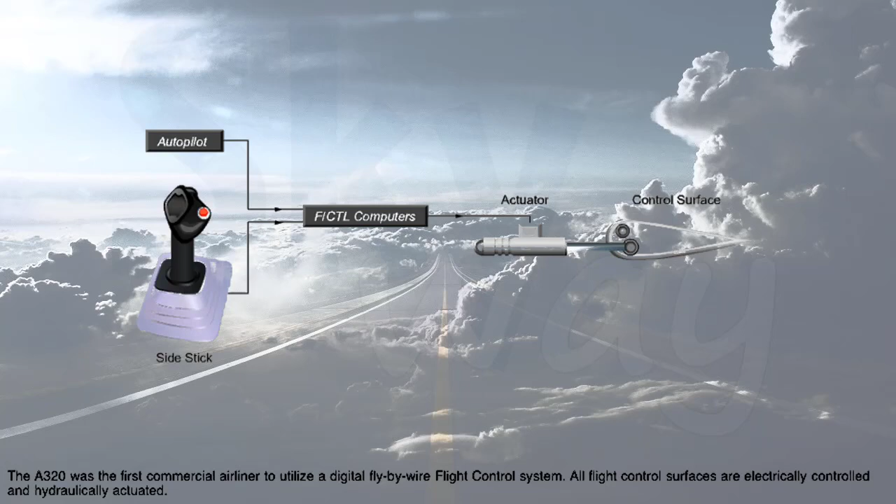The A320 was the first commercial airliner to utilize a digital fly-by-wire flight control system. All flight control surfaces are electrically controlled and hydraulically actuated. This eliminates most of the traditional mechanical complexity and results in reduced weight, reduced maintenance costs, and increased reliability. It also provides optimum aircraft performance and improved fuel efficiency.

Control surfaces on the A320 are conventional. Pitch control is achieved by two elevators mounted on a trimmable horizontal stabilizer. There are 5 spoiler panels and 1 aileron on each wing. Roll control is achieved by the ailerons and spoilers 2, 3, 4, and 5.

In-flight speed brakes are provided by spoilers 2, 3, and 4, and ground spoilers are provided by all 5 spoiler panels on each wing. Yaw control is achieved by a one-piece rudder mounted on the vertical stabilizer. The trimmable horizontal stabilizer, or THS, and the rudder, in addition to electrical control, are mechanically linked to cockpit controls to provide a means of controlling the aircraft should a temporary, complete loss of electrical power occur.

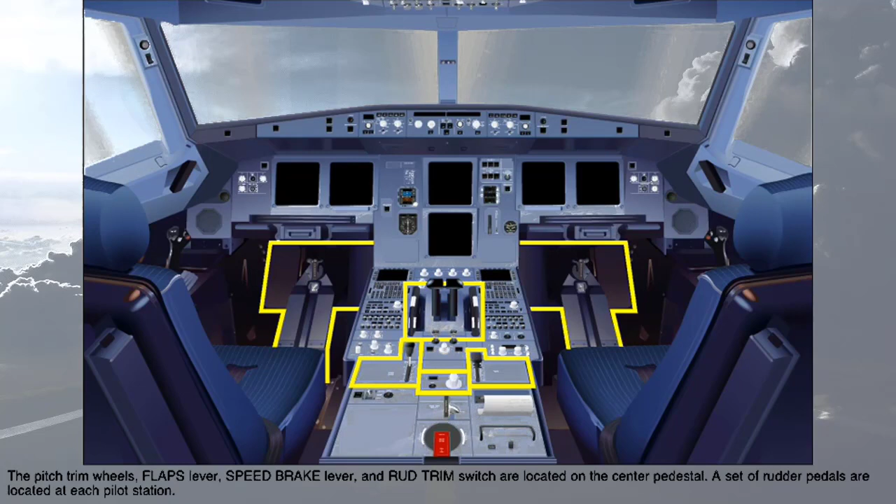Each wing has 2 trailing edge flap surfaces and 5 leading edge slat surfaces that act as lift augmentation devices for takeoff and landing. The pitch trim wheels, flaps lever, speed brake lever, and rudder trim switch are located on the center pedestal. A set of rudder pedals are located at each pilot station. Note there is no aileron trim. Touch a control location to see an enlargement or the right arrow to continue.

The flaps and slats position indicator is found on the upper ECAM display unit. Additional flight control information is found in the memo section. The traditional control column has been replaced by a sidestick controller. The sidestick, along with an auto-trim system, enables the pilot to fly the aircraft more smoothly, with more precision and less effort, and provides a more comfortable ride for the passengers.

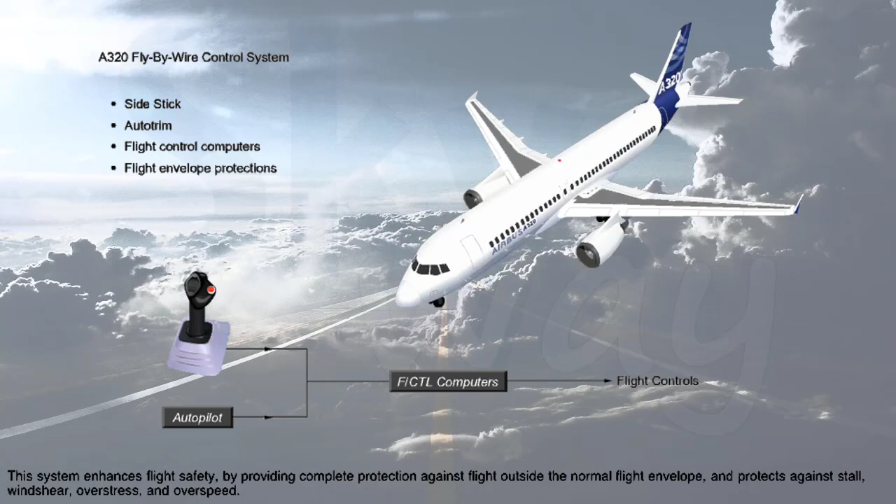Inputs from the sidestick or from the autopilot are processed by the flight control computers, which command the control surface actuators to move as necessary. This system enhances flight safety by providing complete protection against flight outside the normal flight envelope and protects against stall, wind shear, overstress, and overspeed. The sidestick controllers are located on the side consoles.

Flight control is achieved by 3 types of computers, arranged to provide redundancy and failure protection. Different manufacturers, different hardware, and different software have been used to eliminate the potential for common errors. Electrical power sources are also from different electrical buses.

There are 2 elevator aileron computers, or ELACs, for elevator, stabilizer and aileron control, 3 spoiler elevator computers, or SECs, for normal spoilers control and standby elevator and stabilizer control, and 2 flight augmentation computers, or FACs, for electrical rudder control. 1 SEC or 1 ELAC is capable of controlling the aircraft in both the roll and pitch axis. The electronic flight control switches are located on the left and right sides of the overhead panel.

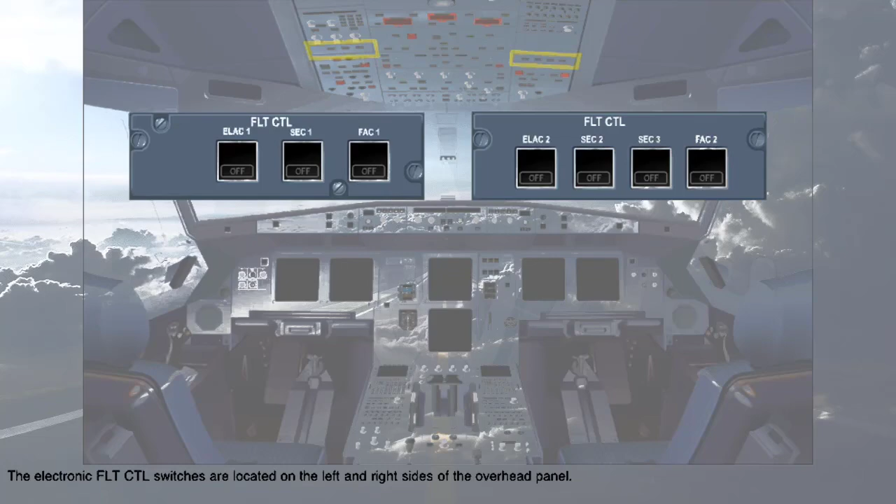The ECAM flight control page is displayed automatically with certain flight control faults and can be selected at any time with the flight control push-button switch on the ECAM control panel. The ECAM wheel page also duplicates the ground spoiler status.

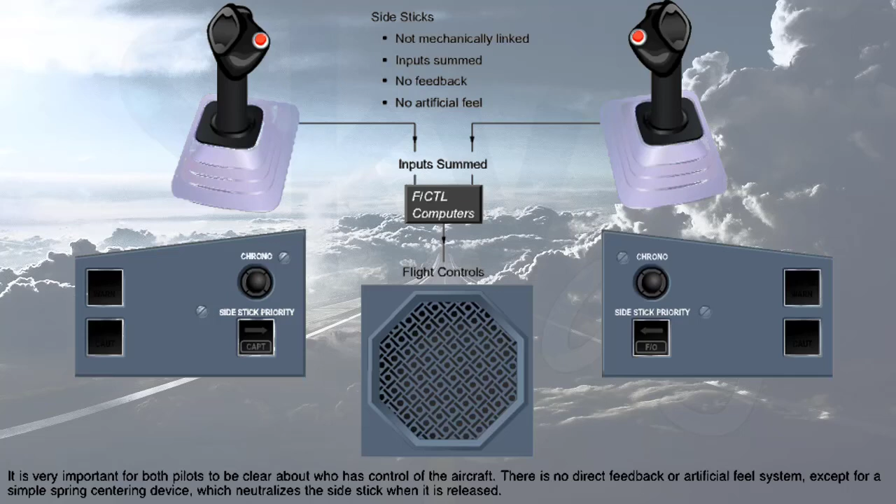The 2 sidesticks allow the pilots to control the aircraft manually in both pitch and roll. They are not linked mechanically, but simultaneous inputs by the captain and first officer are summed. The sum is limited to the maximum deflection by a single sidestick. Dual inputs will cause both green sidestick priority lights to flash and a continuous aural warning, "dual input," will sound. It is very important for both pilots to be clear about who has control of the aircraft. There is no direct feedback or artificial feel system, except for a simple spring centering device which neutralizes the sidestick when it is released.

On the ground, after the first engine is running, the sidestick position indicators come into view on the PFD. They disappear when the aircraft is airborne. The white corner indices indicate the limit of sidestick travel, while the white cross indicates the actual sidestick order from both sidesticks. This is useful for checking full sidestick movement before takeoff, but does not indicate actual control surface position. For control checks, use the surface position indicators on the ECAM flight control page.

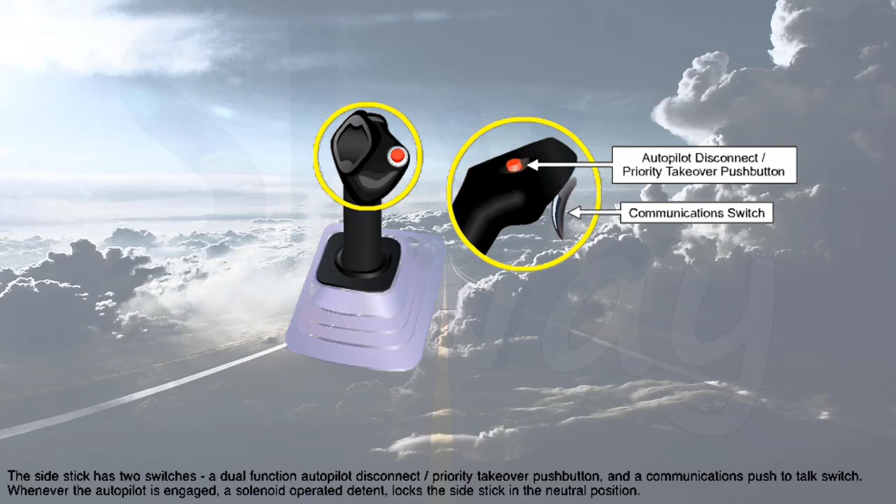The sidestick has two switches, a dual-function autopilot disconnect priority takeover push button and a communications push-to-talk switch. Whenever the autopilot is engaged, a solenoid-operated detent locks the sidestick in the neutral position. If necessary, the detent can be overridden with sufficient pressure to unlock the sidestick, which will also disconnect the autopilot. The normal method to disconnect the autopilot, however, is to press the autopilot disconnect push button on the sidestick.

A pilot can take full control and deactivate the other sidestick by pressing and holding his priority takeover push button. If held for at least 40 seconds, the other sidestick is latched out, and the priority takeover push button can be released without losing priority. Each time a sidestick priority is taken, an audio message, priority left or priority right, is heard. Touch a priority takeover push button.

In addition, the sidestick priority lights on the glare shield indicate which pilot has control. A red arrow in front of a pilot indicates his sidestick has been deactivated and the other pilot has control. To reactivate a sidestick, momentarily press its priority takeover push button. The last pilot to press and hold the priority takeover push button gets control.

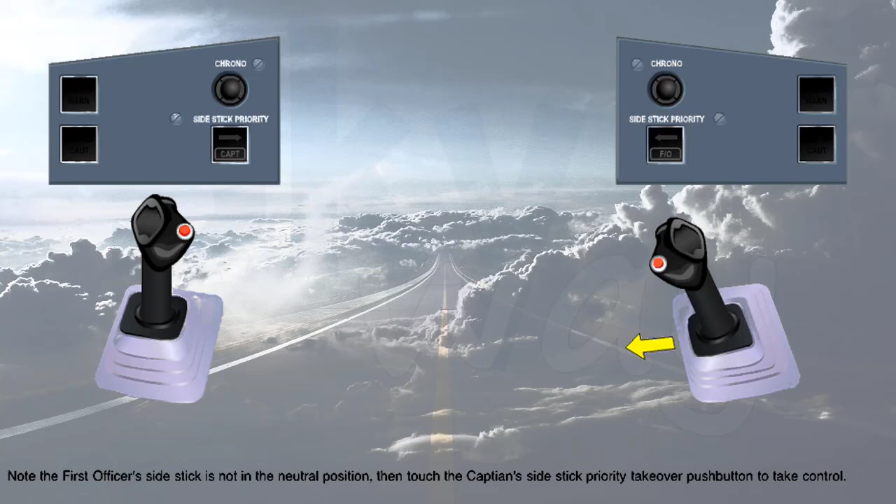Note the first officer's sidestick is not in the neutral position. Then touch the captain's sidestick priority takeover push button to take control. A green light, either captain or first officer, is displayed in front of the pilot who has control when the deactivated sidestick is not in the neutral position. If the deactivated sidestick is released to neutral, the green light goes out, but the red arrow remains. Touch the first officer's sidestick to release it to neutral.

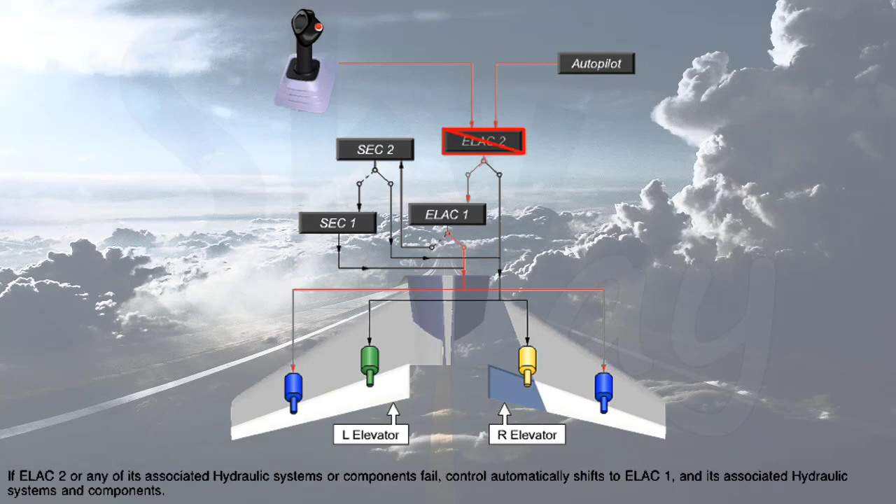For pitch control, the aircraft is equipped with two elevators. Each elevator has two hydraulic actuators powered by different hydraulic systems and controlled by its associated ELAC. Normally, ELAC 2 controls the elevators. If ELAC 2 or any of its associated hydraulic systems or components fail, control automatically shifts to ELAC 1 and its associated hydraulic systems and components. If both ELAC 1 and 2 fail, control automatically shifts to SEC 2 or SEC 1, depending on the nature of the failure.

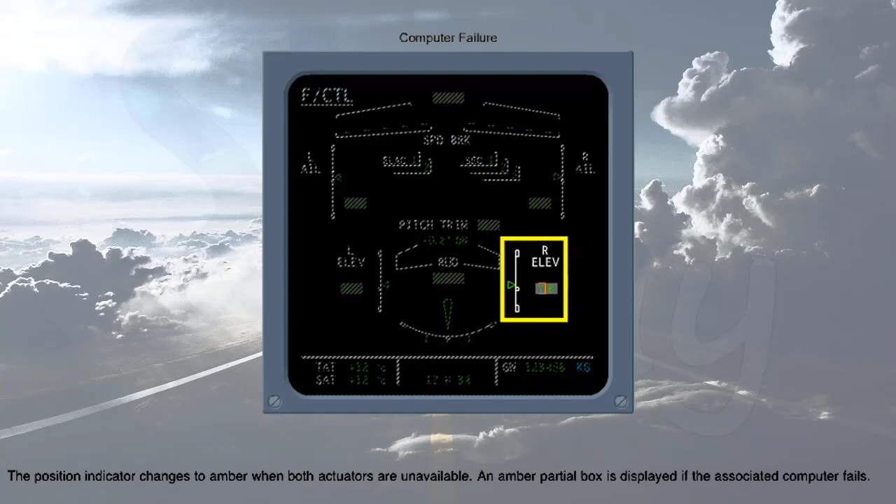The elevator position and hydraulic pressure indication is displayed on the ECAM flight control page. The hydraulic pressure indicator changes to amber when the associated actuator is not available due to hydraulic failure or jamming. The position indicator changes to amber when both actuators are unavailable. An amber partial box is displayed if the associated computer fails.

For pitch trim, the aircraft is equipped with a trimmable horizontal stabilizer or THS. The THS is driven by two hydraulic motors, one powered by the green hydraulic system, the other by the yellow hydraulic system. For the auto pitch trim system, the hydraulic motors are driven by one of three electric motors, with the other two in standby.

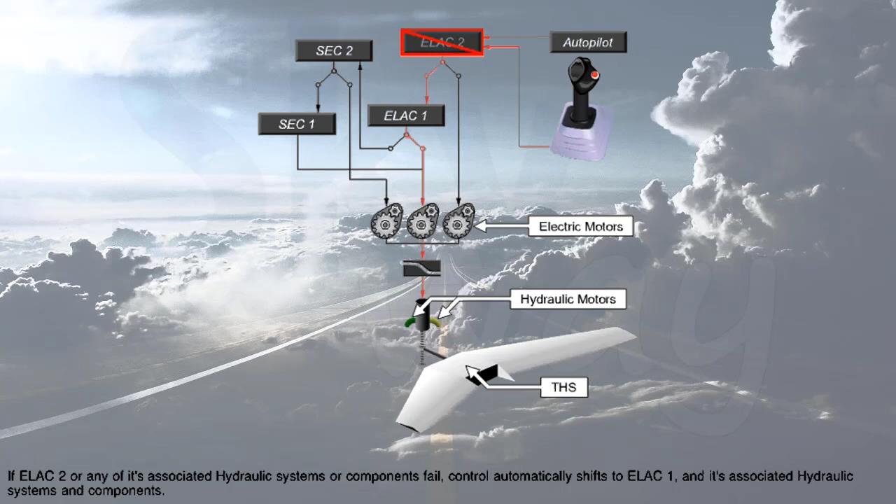Normally, ELAC 2 controls motor number 1. If ELAC 2 or any of its associated hydraulic systems or components fail, control automatically shifts to ELAC 1 and its associated hydraulic systems and components. If both ELAC 1 and 2 fail, control automatically shifts to SEC 2 or SEC 1, depending on the nature of the failure.

The trimmable horizontal stabilizer is mechanically linked to the pitch trim wheel in the cockpit. Moving or holding the pitch trim wheel always has priority over electrical control and is available if either the green or yellow hydraulic system is available. With the failure of either the green or yellow hydraulic system, the trimmable horizontal stabilizer will operate at half speed with no adverse effects.

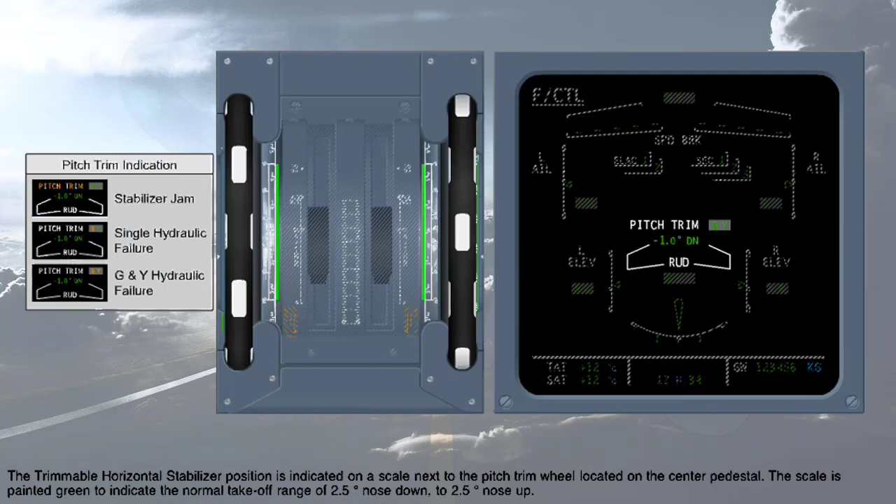The trimmable horizontal stabilizer position is indicated on a scale next to the pitch trim wheel located on the center pedestal. The scale is painted green to indicate the normal takeoff range of 2.5 degrees nose down to 2.5 degrees nose up. The current setting is also displayed on the ECAM flight control page, along with the hydraulic pressure indication, which changes to amber if hydraulic system pressure is low. The legend pitch trim changes to amber if the stabilizer is jammed.

One aileron and 4 flight spoilers on each wing provide roll control. Each aileron, as with the elevators, has 2 hydraulic actuators, each powered by a different hydraulic system and controlled by its associated ELAC. Normally, ELAC 1 and its associated actuators operate in active mode, while ELAC 2 and its associated actuators are in standby mode, ready to take over in the event of a failure. Touch the ELAC 1 fail button or the right arrow to continue.

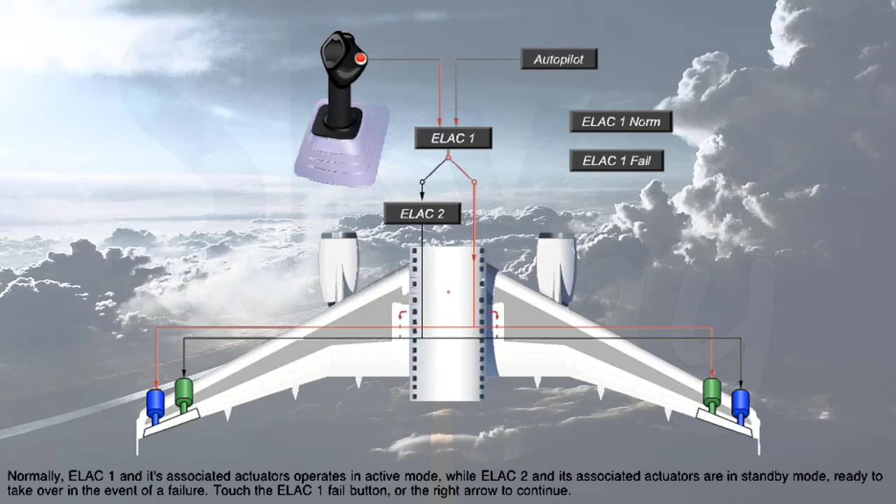Each spoiler panel is positioned by a single servo jack and is powered by a combination of one of the 3 hydraulic systems and one of the 3 SECs. If a SEC fails, control to its associated spoiler panel is lost and the spoilers are automatically retracted and hydraulically held down. If a hydraulic system failure occurs while a spoiler panel is extended, it will be blown down by aerodynamic forces.

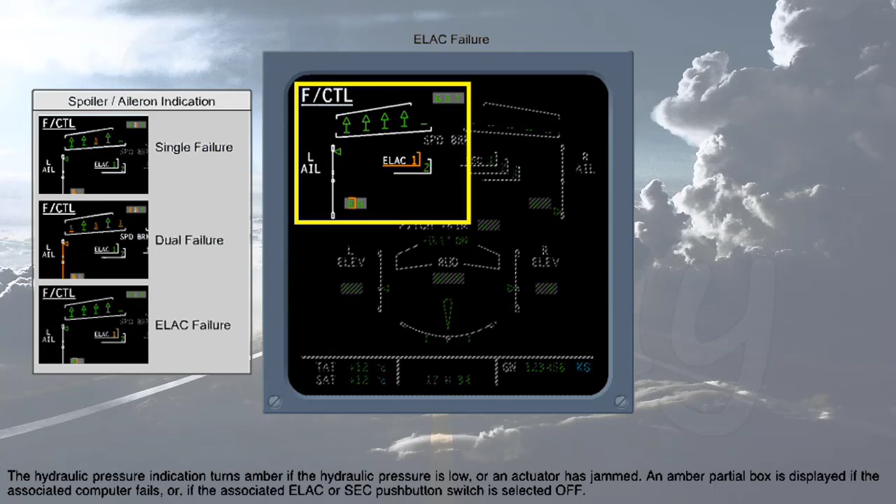Aileron and spoiler position indications are displayed on the ECAM flight control page. Spoiler indications are also repeated on the ECAM wheel page. A green arrow is displayed as soon as a spoiler panel is raised out of its retracted position. The hydraulic pressure indication turns amber if the hydraulic pressure is low or an actuator has jammed. An amber partial box is displayed if the associated computer fails or if the associated ELAC or SEC push-button switch is selected off.

Yaw control is provided by a single rudder panel driven by 3 independent hydraulic jacks operating in parallel. ELAC 1 computes yaw damping and turn coordination orders from the sidestick, autopilot, or rudder pedals and transmits these orders to FAC 1. FAC 1 controls an actuator powered by the green hydraulic system, which in turn drives all 3 rudder hydraulic jacks. FAC 2, along with a yellow actuator, operates in the standby mode, ready to take over in case of a failure. There is no feedback to the rudder pedals from the yaw damping and turn coordination functions.

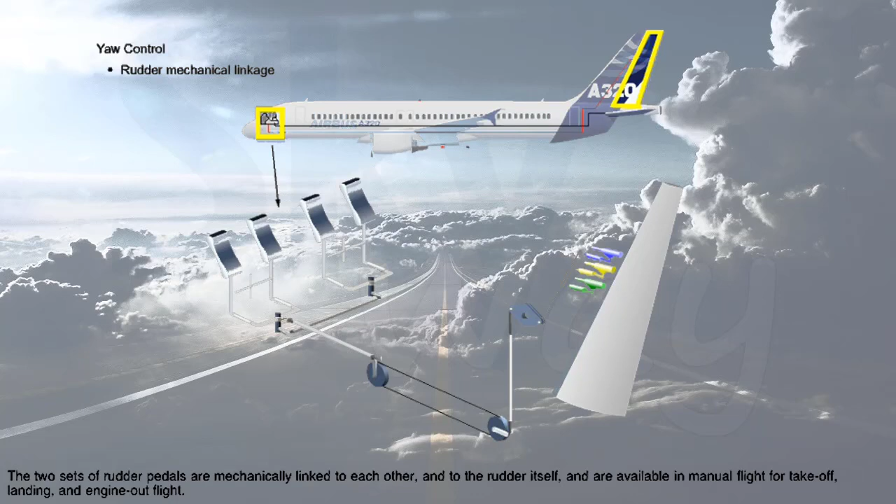The 2 sets of rudder pedals are mechanically linked to each other and to the rudder itself and are available in manual flight for takeoff, landing, and engine-out flight. Rudder and rudder pedal deflection is limited by the FACs as a function of aircraft speed to prevent overstressing of the airframe at high speeds.

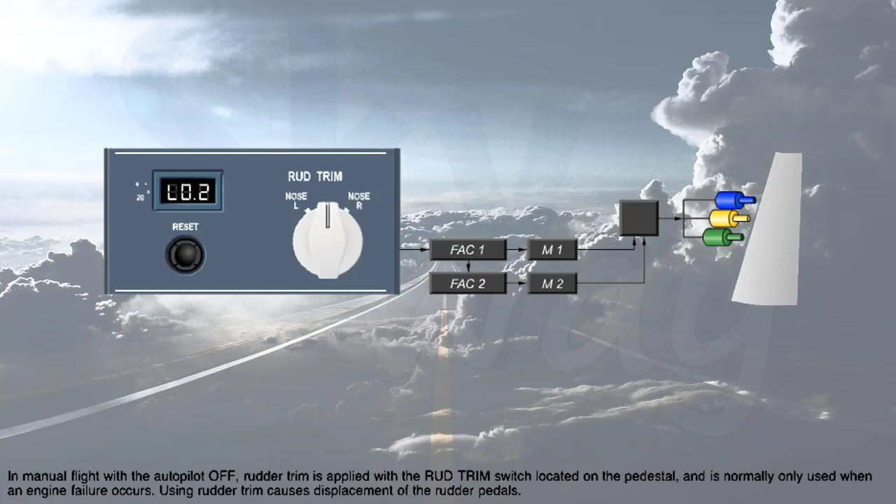Rudder trim is provided by 2 motors, one driven by FAC 1, the other by FAC 2. Normally, motor 1 is active, with motor 2 in standby. In manual flight with the autopilot off, rudder trim is applied with the rudder trim switch located on the pedestal and is normally only used when an engine failure occurs. Using rudder trim causes displacement of the rudder pedals. A reset button allows the trim to be reset to 0. Note, with the autopilot engaged, the rudder trim rotary switch and the rudder trim reset push button are not active.

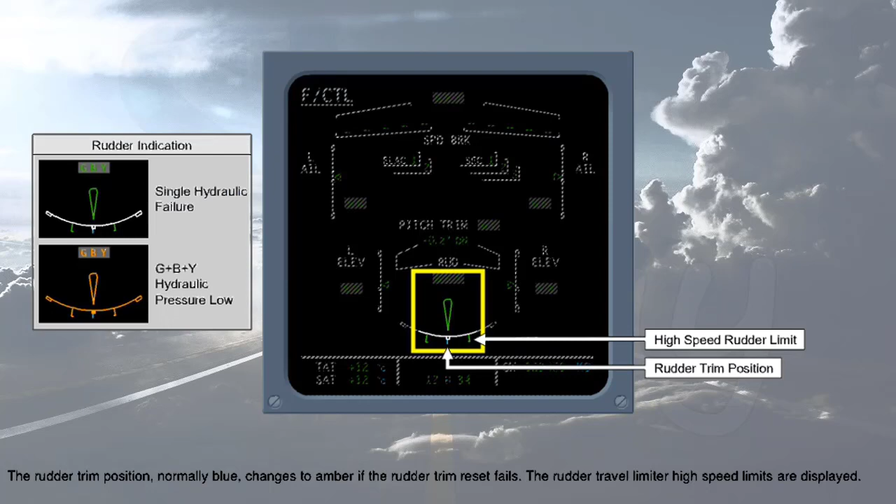Rudder position is displayed on the ECAM flight control page. The hydraulic indicator changes to amber with a hydraulic system failure. The rudder symbol and scale become amber if all 3 hydraulic systems pressures are low. The rudder trim position, normally blue, changes to amber if the rudder trim reset fails. The rudder travel limiter high-speed limits are displayed.

Spoiler panels 2, 3, and 4 act as speed brakes in flight. However, the roll control function of the spoiler panels always has priority, and speed brakes may retract to satisfy a roll order. Spoiler panel 2 max deflection is less than that of spoiler panels 3 and 4. Speed brakes are selected by pushing down and then moving the speed brake lever aft to the desired position. There is a detent at the half position. The speed brakes will not extend if the flaps are in config full, and if extended, will retract when config full is selected. Touch the speed brake lever to see the operation of the speed brakes.

The speed brakes are inhibited if SEC 1 and SEC 3 both have faults. If an elevator has a fault, spoilers 3 and 4 will be inhibited. The speed brakes are also inhibited if alpha floor is active or if the thrust levers are greater than MCT. When an inhibition occurs, the spoilers automatically retract until the inhibition condition disappears and the pilot resets the speed brake lever.

When the aircraft is flying faster than 315 knots or Mach 0.75 and the autopilot is engaged, the speed brake retraction rate is reduced. It takes from about 25 seconds to 50 seconds for the speed brakes to retract, depending on aircraft modifications. On some aircraft, again depending on aircraft modification, when the autopilot is engaged, max speed brake panel deflection is reduced and is achieved with half speed brake lever selection.

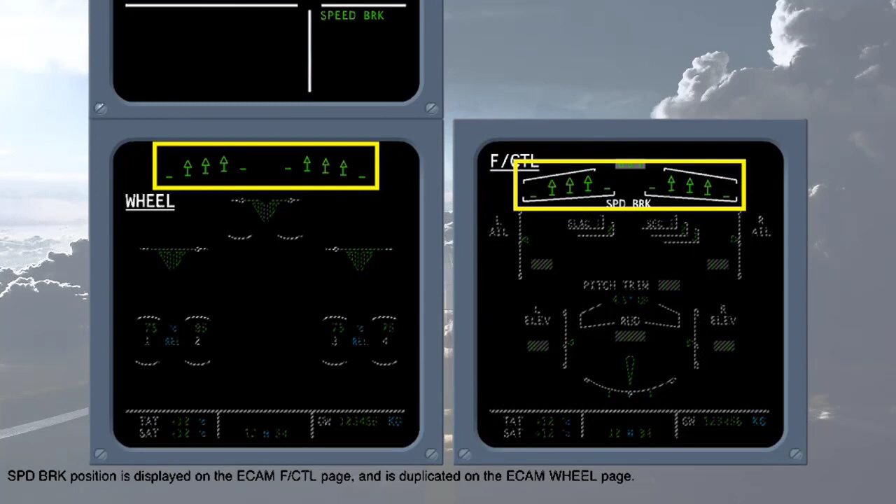Speed brake position is displayed on the ECAM flight control page and is duplicated on the ECAM wheel page. The message speed brake appears in the memo section of the upper ECAM when the speed brakes are extended. It flashes amber when engine N1 is greater than 50%. All 5 spoiler panels act as ground spoilers. They are armed for takeoff and landing by raising the speed brake lever straight up into the armed position. The message ground spoilers armed appears on the upper ECAM.

The ground spoilers, when armed, extend automatically during a rejected takeoff when the aircraft speed is greater than 72 knots and both thrust levers are selected to idle. On landing, the ground spoilers extend when both main landing gear touch down and the thrust levers are set to idle. If the ground spoilers were not armed for landing, they will extend automatically after both main gear have touched down when at least one engine is selected to reverse and the other is at idle.

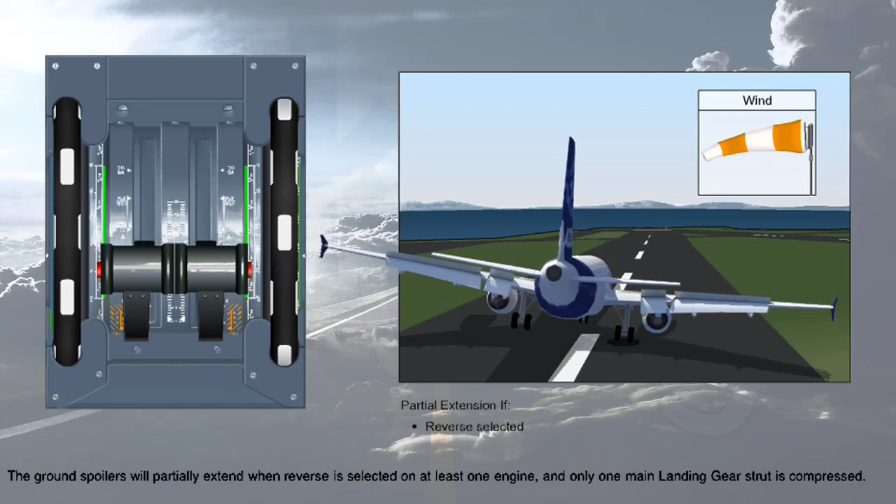The ground spoilers will partially extend when reverse is selected on at least one engine and only one main landing gear strut is compressed. For example, in a crosswind landing, if the upwind gear touches down first and reverse is selected, the ground spoilers will partially extend to ease the other landing gear onto the runway. Subsequently, full ground spoiler extension will occur.

The ground spoilers will retract automatically during a touch-and-go landing when at least one thrust lever is advanced above 20 degrees. Touch the thrust levers to select takeoff power. When the ground spoilers extend, the speed brake lever does not move. The only visual indication that they have extended is on the lower ECAM wheel page, which will be automatically displayed for landing and during a rejected takeoff.

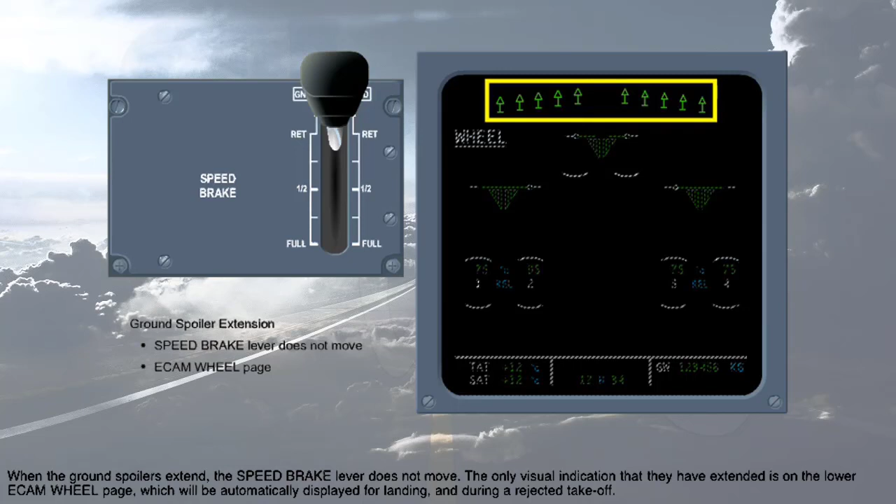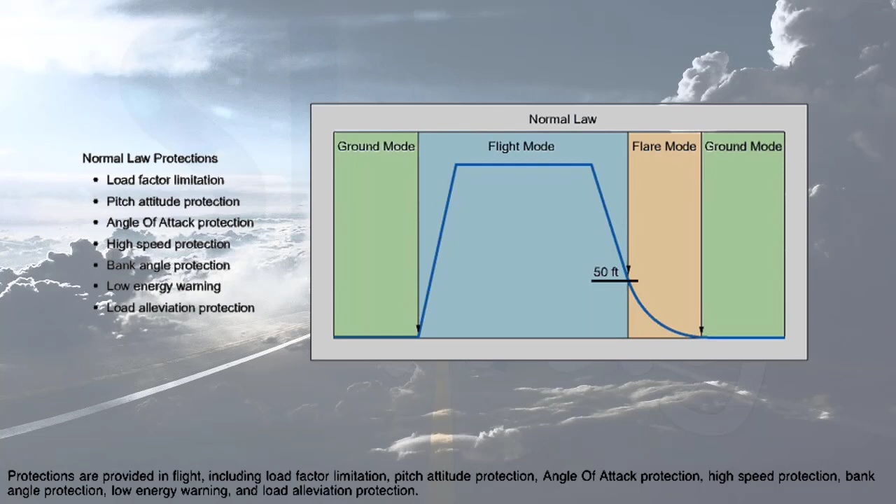All aircraft fitted with fly-by-wire control systems have, within the flight control computers, control laws which determine how the aircraft flight control surfaces should be positioned at any given time. On the A320, normal law is active when all flight control surfaces function, even after certain flight control computer, hydraulic, or electrical faults. Protections are provided in flight, including load factor limitation, pitch attitude protection, angle of attack protection, high speed protection, bank angle protection, low energy warning, and load alleviation protection. Normal law encompasses 3 modes: ground mode, flight mode, and flare mode.

On the ground, because sophisticated protections are not required, elevator deflection is in direct proportion to sidestick movement. Auto trim is not functional, allowing the pilots to set the trimmable horizontal stabilizer manually for takeoff to adjust for C of G variations. Ground mode allows the elevators to move to the max deflection of 30 degrees nose up and 15 degrees nose down in order to perform the pre-flight control check.

Upon reaching 70 knots during the takeoff roll, max nose-up elevator deflection is reduced to 20 degrees to prevent the possibility of a tail strike at rotation. As soon as the aircraft becomes airborne, the transition to flight mode is blended in over a period of 5 seconds.

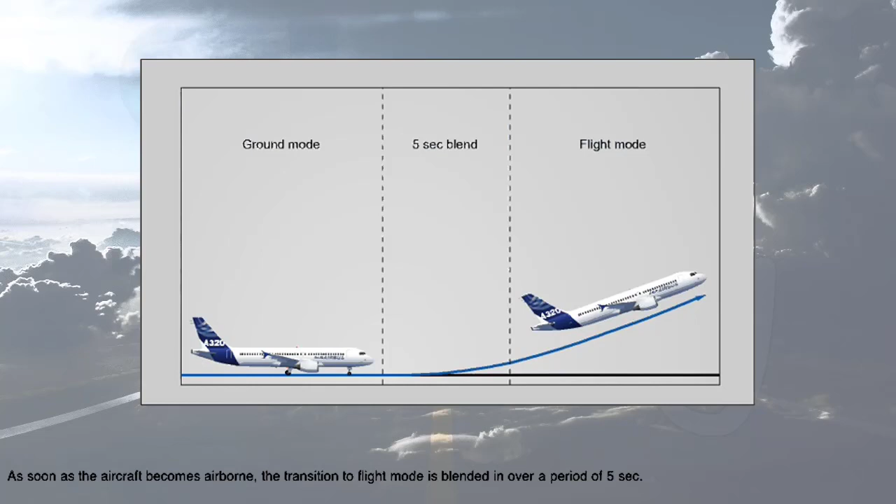In pitch normal law, with the side stick in the neutral position, the pitch demand is to maintain a constant 1g. This is the equivalent of maintaining a constant trajectory or flight path angle. Stick free, the elevator will be deflected in order to attempt to maintain constant trajectory through speed changes, changes in configuration, or atmospheric disturbances. Moving the side stick aft results in a demand for greater than 1g or positive g, and moving it forward results in a demand for less than 1g or negative g.

Once the aircraft is flying the required trajectory or flight path angle, the side stick can be released to its neutral position and the aircraft will again maintain 1g. This means that it will maintain the new trajectory. Control inputs are made to alter or change the flight path, not to maintain it. Therefore, a side stick input can be considered as selecting a vector or vertical trajectory through space.

Automatic pitch trim also operates in normal law. If a sustained elevator deflection is required to maintain trajectory during speed or configuration changes or to maintain a newly selected trajectory, auto trim will automatically reposition the stabilizer so that the elevator deflection with respect to the stabilizer can be reduced to 0, just as is done by pitch trimming a conventional aircraft during manual flight.

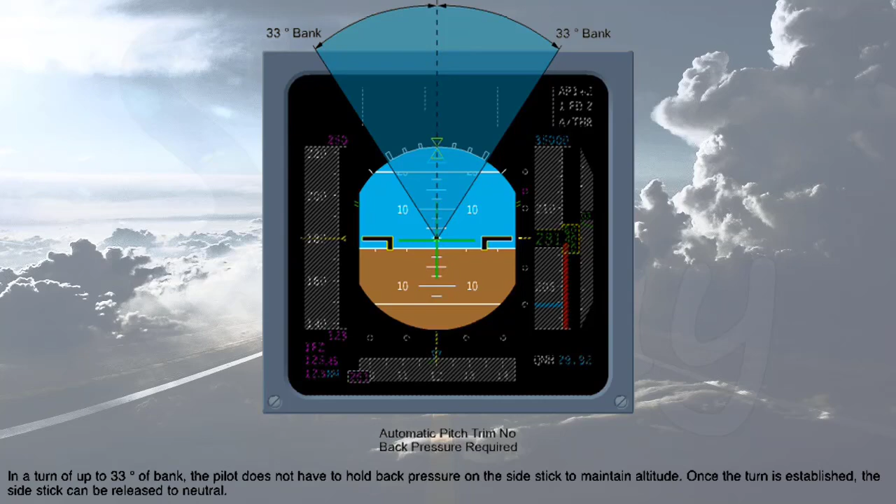As the aircraft descends through 50 feet for landing, flight mode changes to flare mode, a modified form of pitch normal law. The aircraft memorizes the pitch attitude at 50 feet, then at 30 feet begins to progressively reduce the pitch attitude to -2 degrees over a period of 8 seconds. The auto trim is also deactivated. This simulates the behavior of a conventional aircraft as it becomes influenced by ground effect and means that the pilot must apply a conventional flare technique, moving the side stick aft to achieve the correct landing attitude for touchdown.

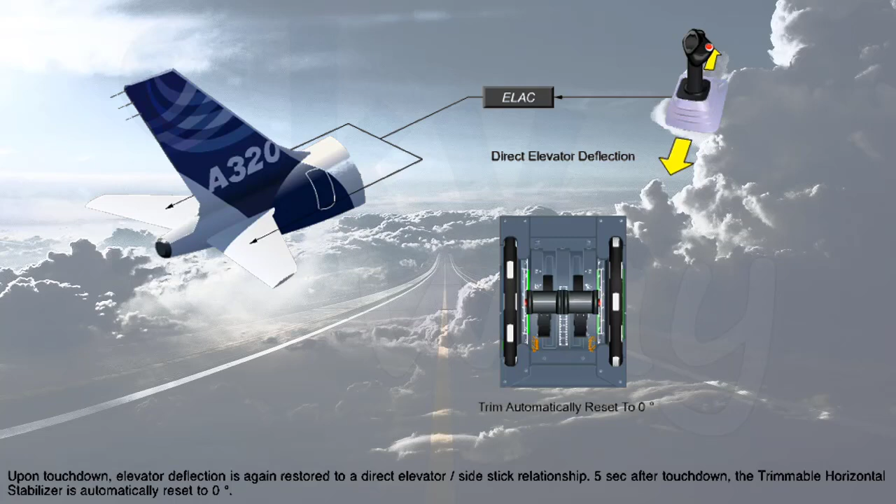If a go-around is attempted below 50 feet, flight mode and therefore auto trim would not be restored until reaching 50 feet, and more than normal pitch force may be required to pull the aircraft up to and maintain the go-around attitude. Upon touchdown, elevator deflection is again restored to a direct elevator-side stick relationship. 5 seconds after touchdown, the trimmable horizontal stabilizer is automatically reset to 0 degrees.

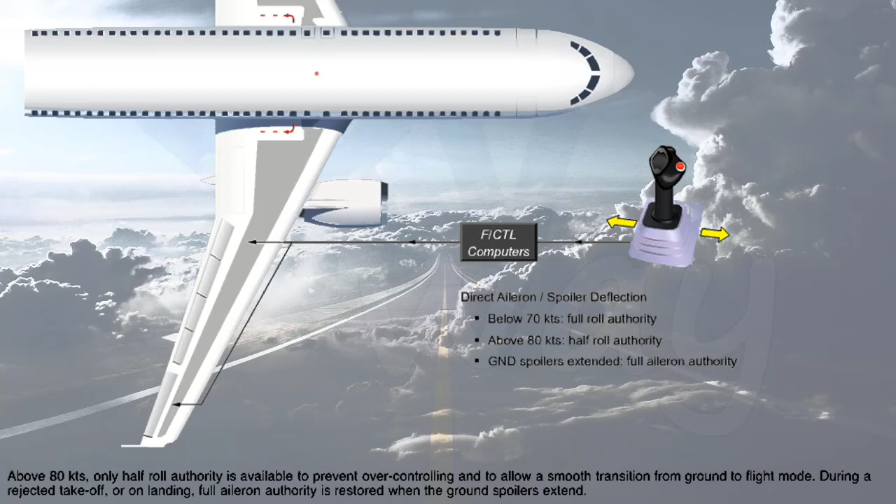In lateral ground mode, as with pitch ground mode, the side stick demands aileron and spoiler deflection directly proportional to side stick inputs. Up to 70 knots, full aileron spoiler deflection is available in order to perform the pre-takeoff control check. Above 80 knots, only half roll authority is available to prevent over-controlling and to allow a smooth transition from ground to flight mode. During a rejected takeoff or on landing, full aileron authority is restored when the ground spoilers extend. The transition from ground to flight mode occurs 1/2 second after the aircraft becomes airborne.

In flight, the side stick demands a roll rate rather than a direct aileron spoiler deflection. The rate of roll is proportional to the amount of lateral side stick input, with a maximum rate of 15 degrees per second if held to the stop. The lateral normal law is a combined roll and yaw law. Thus, a side stick input mixes orders to the ailerons, spoilers, and yaw damper.

The side stick also gives a bank angle demand when it is released to neutral. Stick neutral is a demand for zero roll rate. Thus, in a bank of up to 33 degrees, the aircraft will maintain the bank angle at the time the stick was released. Also, feedback to the pitch normal law is made such that up to 33 degrees of bank, an increased G demand is made to compensate for the bank angle, and no additional back pressure is necessary on the side stick while in the turn.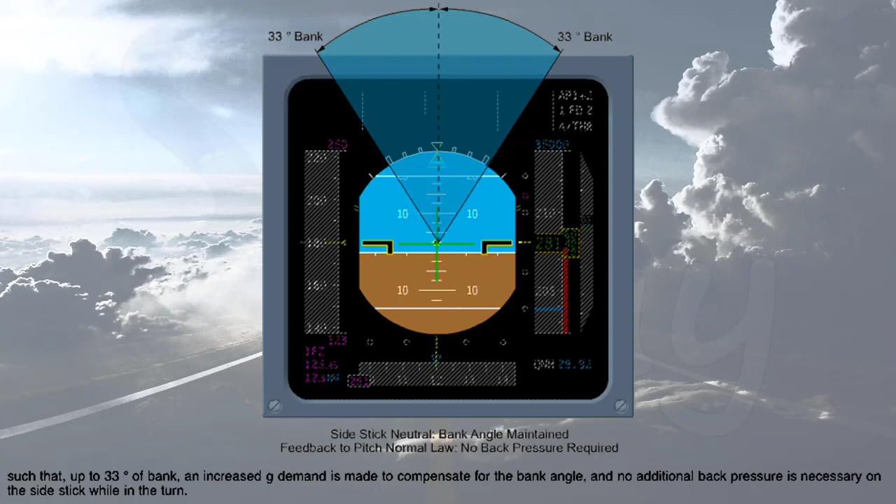If the rudder pedals are depressed when the side stick is in the neutral position, the lateral controls attempt to zero the roll rate and a side slip is automatically performed. The aircraft trajectory does not change significantly. This is an important technique for crosswind landings.

In the engine failure case, if the side stick is left in neutral, the aircraft attempts to zero the induced roll rate by automatically displacing the ailerons, spoilers, and rudder. However, a slow heading drift will occur as the aircraft rolls and yaws in response to the engine failure. Pilot action on the rudder pedals is required to stop the heading drift and bring the aircraft back to the ideal state of side slip.

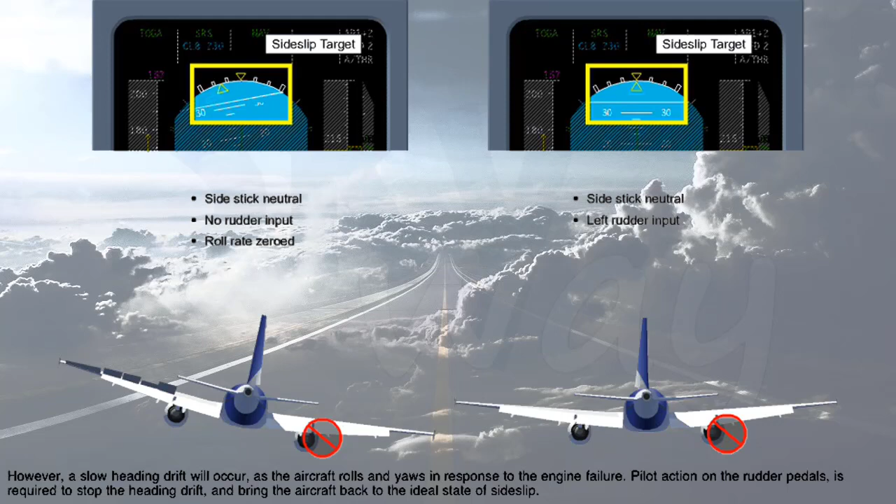To assist the pilot, the side slip indicator on the PFD becomes a side slip target indicator known as the beta target. Whereas the side slip indicator is yellow, the beta target is blue. Pilot response is instinctive. As with a conventional slip ball, step on the target to align it with the roll index. The side slip indicator will change to the beta target whenever a difference of thrust between the two engines is 35% N1 or more, and one engine is at least 80% N1, providing the flaps are at 1, 2, or 3.

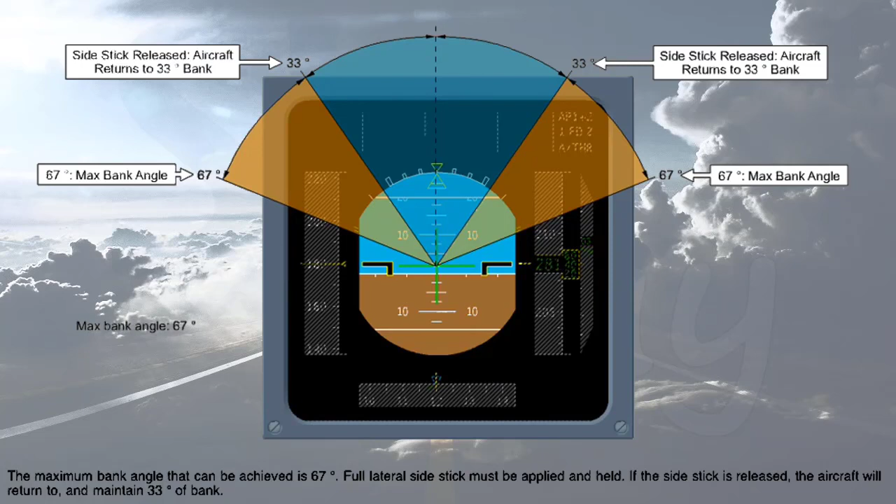The maximum bank angle that can be achieved is 67 degrees. Full lateral side stick must be applied and held. If the side stick is released, the aircraft will return to and maintain 33 degrees of bank. Beyond 33 degrees of bank, there is no pitch compensation. Aft control inputs would be required, as in a conventional aircraft, to maintain the desired pitch angle. The max bank angle of 67 degrees is indicated on the PFD by a pair of green bars. When the bank angle exceeds 45 degrees, the flight director bars disappear.

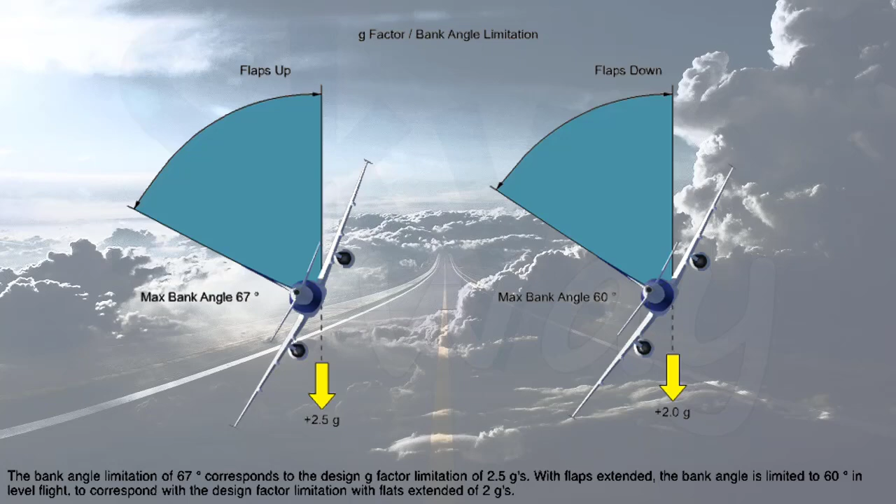The bank angle limitation of 67 degrees corresponds to the design G factor limitation of 2.5 Gs. With flaps extended, the bank angle is limited to 60 degrees in level flight to correspond with the design factor limitation with flaps extended of 2 Gs. When high speed or angle of attack protection is active, the maximum bank angle with full side stick deflection is reduced from 67 to 45 degrees. If the side stick is released to neutral, the aircraft will return to wings level when high speed protection is active, or to a maximum of 33 degrees of bank if high angle of attack protection is active.

The load alleviation function, or LAF, reduces wing structure loads in conditions of turbulence by rapidly deflecting the ailerons and spoilers 4 and 5 symmetrically upwards when the aircraft load factor differs by 0.3 G compared to aircraft demanded load. To assist with the high hydraulic demands required, dedicated hydraulic accumulators are installed near the associated controls. LAF is inhibited with slats or flaps extended below 200 knots, or above VMO plus 10 knots.

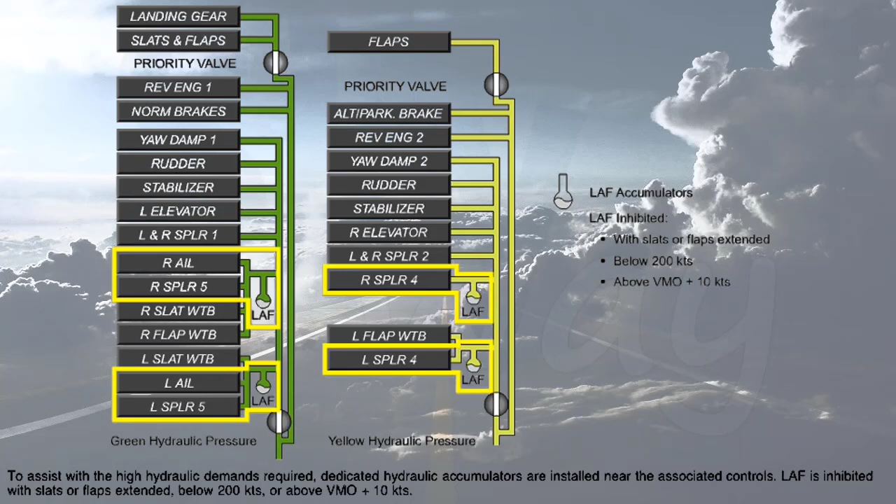The load alleviation function operates in a degraded mode with associated failures. The LAF degraded message appears on the ECAM flight control page. With a total loss of the load alleviation function, LAF is displayed in the INOP systems column on the ECAM status page.

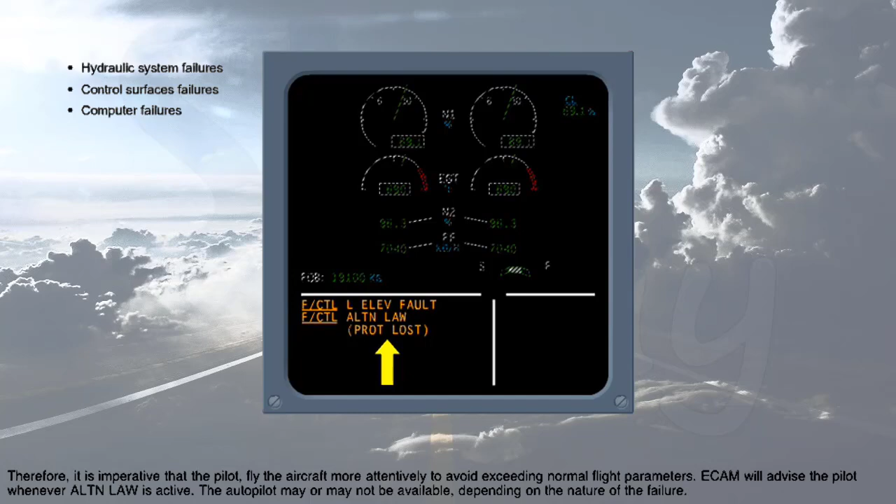Aircraft more attentively to avoid exceeding normal flight parameters. ECAM will advise the pilot whenever alternate law is active. The autopilot may or may not be available depending on the nature of the failure.

In pitch alternate law, as in normal law, the sidestick still demands a G maneuver, and auto trim is still available. Thus, pitch control in alternate law is very similar to normal law. However, the only protection available is the load factor limitation. With no pitch attitude protection, amber X's replace the double green pitch attitude limit bars on the PFD.

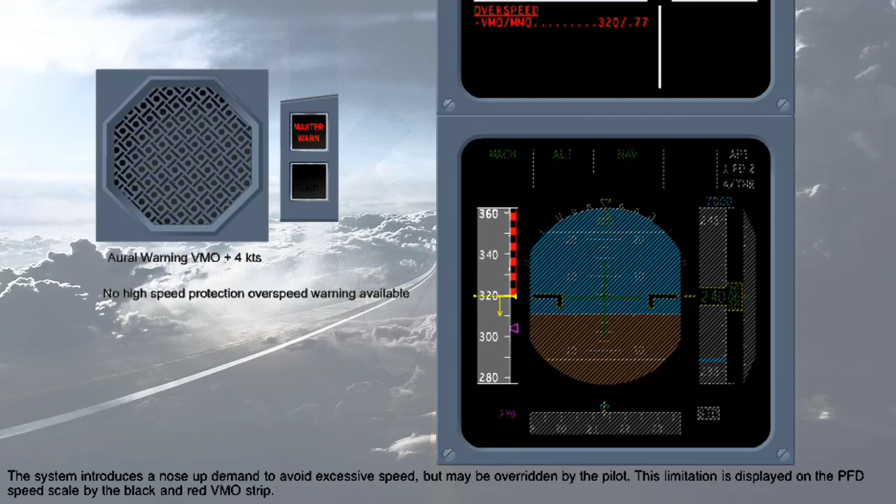Because of the lack of high-speed protection and to give the pilot more time to react to an overspeed condition, the high-speed envelope is further reduced to 320 knots, Mach 0.77. The system introduces a nose-up demand to avoid excessive speed, but may be overridden by the pilot. This limitation is displayed on the PFD speed scale by the black and red VMO strip. In addition, there is an aural overspeed warning at VMO plus 4 or MMO plus 0.006.

At the low end of the speed envelope, a nose-down pitch order is added, starting at 5 to 10 knots above the stall, that will gently push the nose over in order to keep the speed from decreasing further. If the pilot continues to pull the stick back, the aircraft will stall, since angle of attack and alpha floor protections are not available. An aural stall warning is generated at an appropriate margin above the stall.

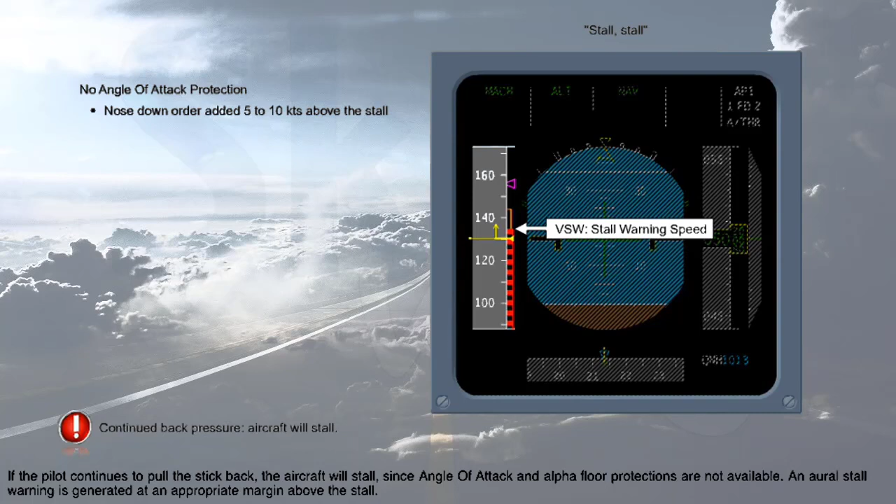The PFD speed scale presentation changes in alternate law. VSW, stall warning speed, rather than alpha prot and alpha max, is displayed at the top of the red and black band. It is also possible, with a combination of failures, to have alternate law without any kind of low speed or high speed protections. However, the load factor limitation is always available.

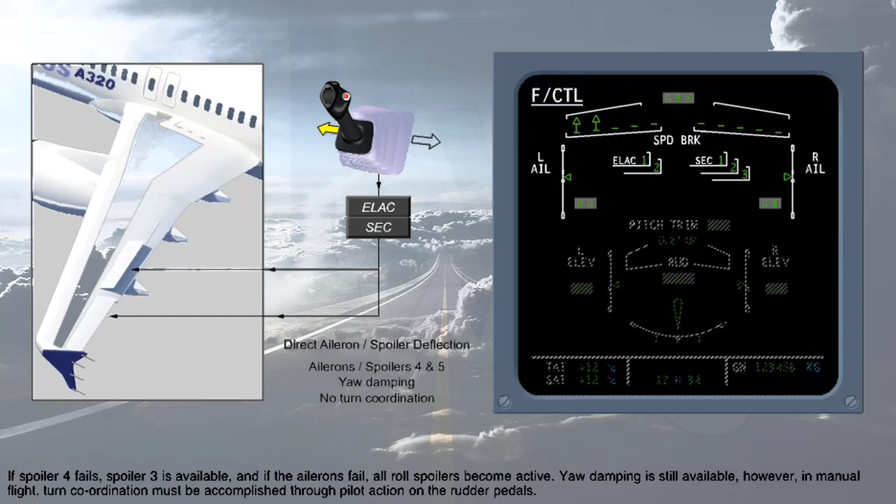In alternate law lateral control, aileron spoiler deflection is always in direct proportion to sidestick deflection. Along with the ailerons, only spoilers 4 and 5 are used in order to reduce the roll rate to a comfortable value. If spoiler 4 fails, spoiler 3 is available, and if the ailerons fail, all roll spoilers become active. Yaw damping is still available; however, in manual flight, turn coordination must be accomplished through pilot action on the rudder pedals. Bank angle protection is not provided. Amber X's replace the double green bars on the PFD.

Direct law becomes active when, for example, there is a triple inertial reference system failure, or both radio altimeters have failed and the landing gear is selected down. Also, in all cases where alternate law is the active law, as soon as the landing gear is lowered, direct law becomes active. The only exception to this activation of direct law is when alternate law has been activated from an abnormal attitude, which does not put the aircraft into direct law when the landing gear is lowered. Direct law in flight is extremely rare and usually momentary until the crew isolates the associated failed systems.

In direct law, both pitch and lateral control is a direct sidestick to control surface relationship. There are no protections in direct law; however, aural overspeed and stall warnings are still available. The autopilot, yaw damping, and turn coordination are not available; therefore, yaw must be controlled with rudder pedal input. In direct law, auto trim is lost, and trim changes due to speed and configuration changes must be trimmed manually with the pitch trim wheel. The message "Use manual pitch trim" is displayed in amber on the PFD as a reminder.

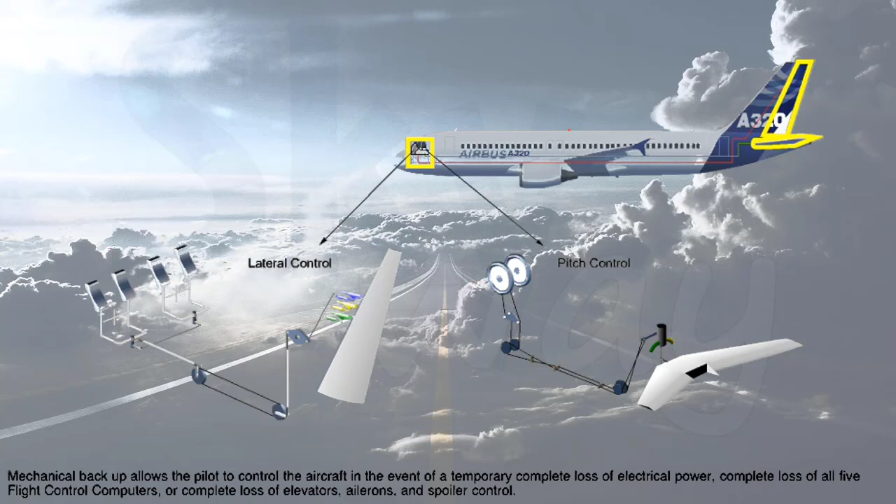Mechanical backup allows the pilot to control the aircraft in the event of a temporary complete loss of electrical power, complete loss of all 5 flight control computers, or complete loss of elevators, ailerons, and spoiler control. In pitch, this is done by manually moving the horizontal stabilizer by means of the pitch trim wheel. For lateral control, the pilot uses the rudder pedals. On the PFD, the message "Manual pitch trim only" is displayed in red.

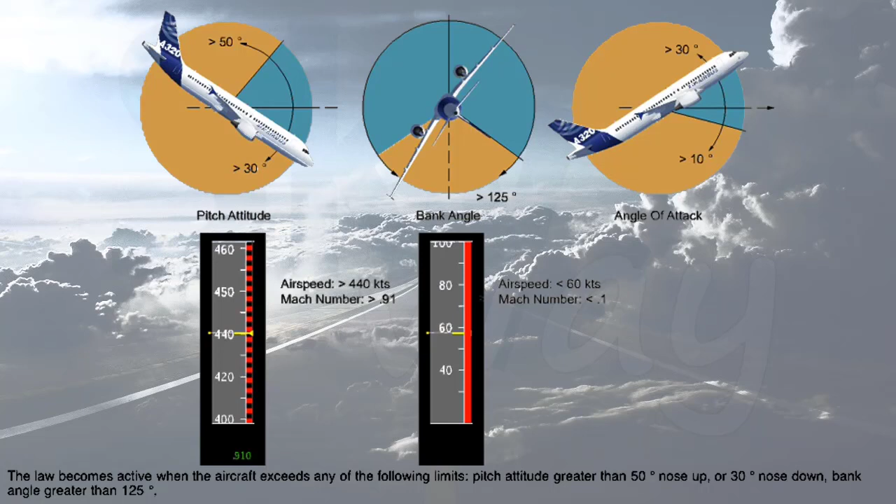If the aircraft is thrown out of control due to, for example, clear air turbulence, the abnormal attitude law allows the pilot to bring the aircraft back to within the normal flight envelope. The law becomes active when the aircraft exceeds any of the following limits: pitch attitude greater than 50 degrees nose up or 30 degrees nose down, bank angle greater than 125 degrees, angle of attack greater than 30 degrees or less than -10 degrees, airspeed greater than 440 knots or Mach number greater than 0.91, airspeed less than 60 knots or Mach number less than 0.1.

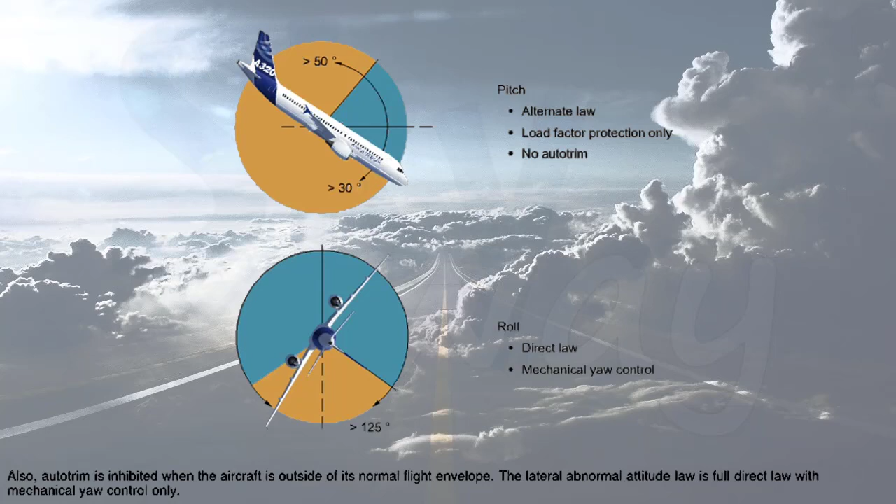The abnormal attitude law in pitch is similar to alternate law, with no protections except load factor protection. Also, auto trim is inhibited when the aircraft is outside of its normal flight envelope. The lateral abnormal attitude law is full direct law with mechanical yaw control only. When the aircraft returns to level flight, pitch alternate law without protections and lateral direct law with yaw damping but no turn coordination is active. As well, auto trim again becomes active.

Each wing has 5 leading edge slat surfaces and 2 trailing edge flap surfaces. Slats and flaps are selected by a single flaps lever located on the center pedestal. Touch the flaps lever to select full flaps.

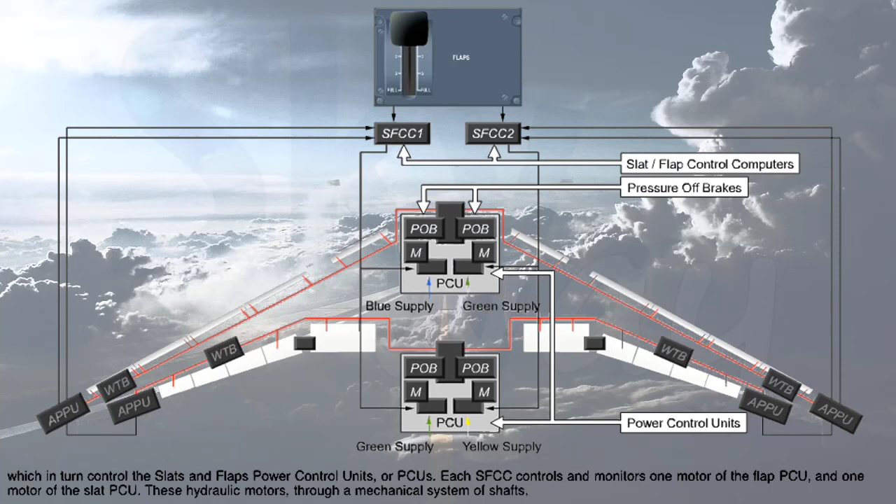Two dual-channel slat flap control computers, or SFCCs, monitor and control the slats and flaps. When a flap selection is made with the flaps lever, a signal is sent to the SFCCs, which in turn control the slats and flaps power control units, or PCUs. Each SFCC controls and monitors one motor of the flap PCU and one motor of the slat PCU. These hydraulic motors, through a mechanical system of shafts, gearboxes, and actuators, move the slats and flaps to the desired position. When the slats and flaps have reached their selected position, pressure-off brakes, or POBs, lock the hydraulic motors to prevent unwanted movement.

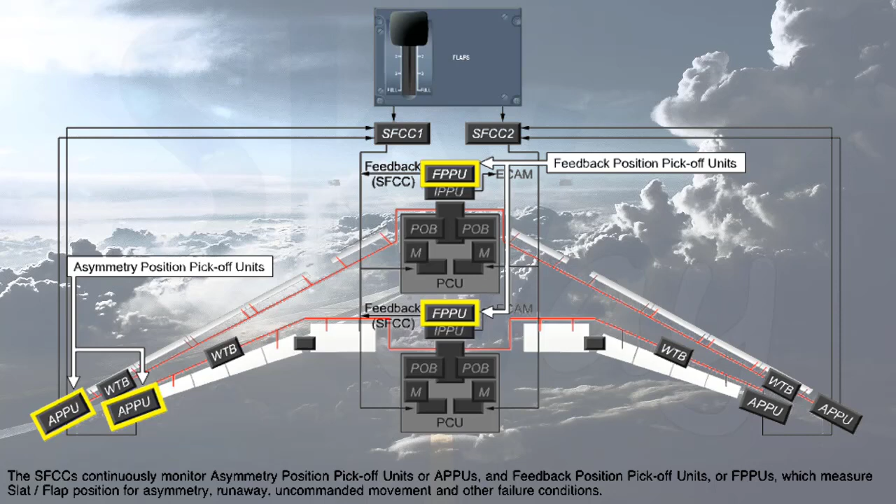With a failure of one of the associated hydraulic systems or one of the SFCCs, the corresponding slats and/or flaps will operate at half speed. The SFCCs continuously monitor asymmetry position pickoff units, or APPUs, and feedback position pickoff units, or FPPUs, which measure slat flap position for asymmetry, runaway, uncommanded movement, and other failure conditions. If both SFCCs detect a failure, the wingtip brakes, or WTBs, lock the slats or flaps position and send a warning to the ECAM. Wingtip brakes, once activated, can only be reset on the ground.

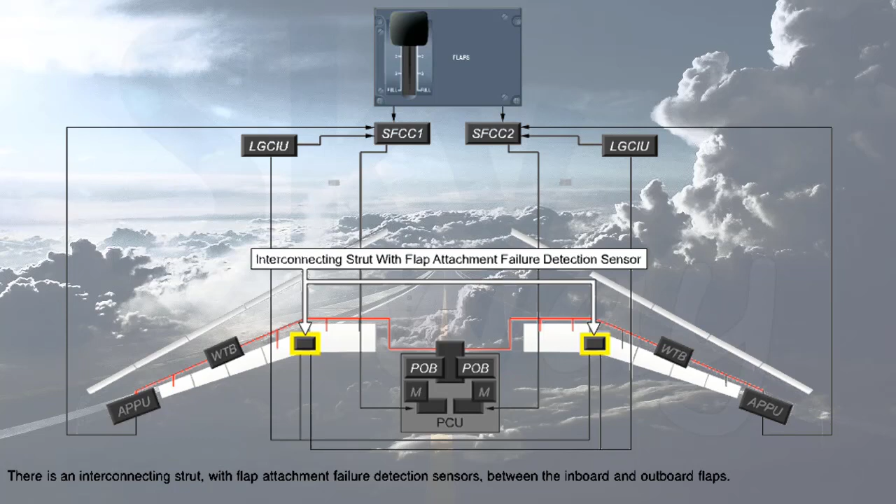Two instrumentation position pickoff units, or IPPUs, one for the slats and one for the flaps, send position data to the upper ECAM slats flaps position indicator. There is an interconnecting strut with flap attachment failure detection sensors between the inboard and outboard flaps. If a position difference is sensed, a signal is sent to one of the landing gear control interface units, or LGCIUs, and the movement of the flaps is stopped by the pressure-off brakes.

The flaps lever has 5 detents, 0, 1, 2, 3, and full, corresponding to the different slat flap configurations. Below the flap lever knob is a collar, which must be lifted in order to move the lever out of each detent. There is an internal baulk between positions 1 and 2 and between positions 3 and full. To move past the baulk, the collar must be released, then squeezed again, preventing an excessive movement selection from full to 1 in the event of a go-around and from 2 to 0 during normal retraction.

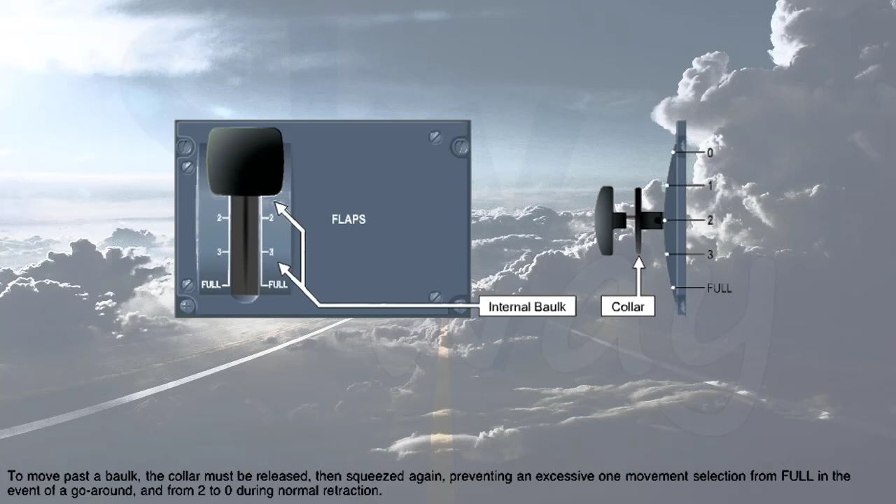The flap indicator on the upper ECAM uses the shape of the wing to display slat flap configuration. A gray symbol represents the fixed wing center section, and the slats and flaps are represented by green boxes on either end of the wing. With the first flap selection, white points and an S and F appear to show the possible slat flap configurations. These are not visible when the aircraft is in a clean configuration. The selected flap position is shown in cyan below the gauge, and a blue symbol appears at the selected flap position. Flap movement is indicated by the green flap position indicator moving out toward the selected position. Once the flaps and slats reach the selected position, the selected surface position indication disappears and the selected flap position indication turns to green.

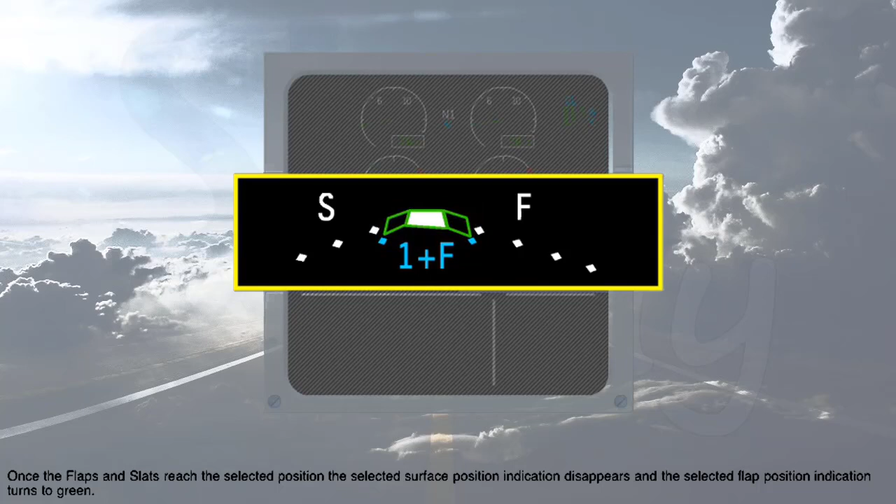The chart shows the possible slat flap configurations. When config 1 is selected for takeoff on the ground, both slats and flaps extend. When config 1 is selected in flight, only the slats extend, and the flaps will then extend when the lever is selected to the config 2 position. After takeoff, with config 1 plus F, the flaps only will automatically retract at 210 knots to prevent exceeding the max flap extension speed of 215 knots. This may occur at high aircraft gross weights, where the slat retraction speed is close to 210 knots. After an automatic retraction, automatic re-extension does not occur if the speed again drops below 210 knots.

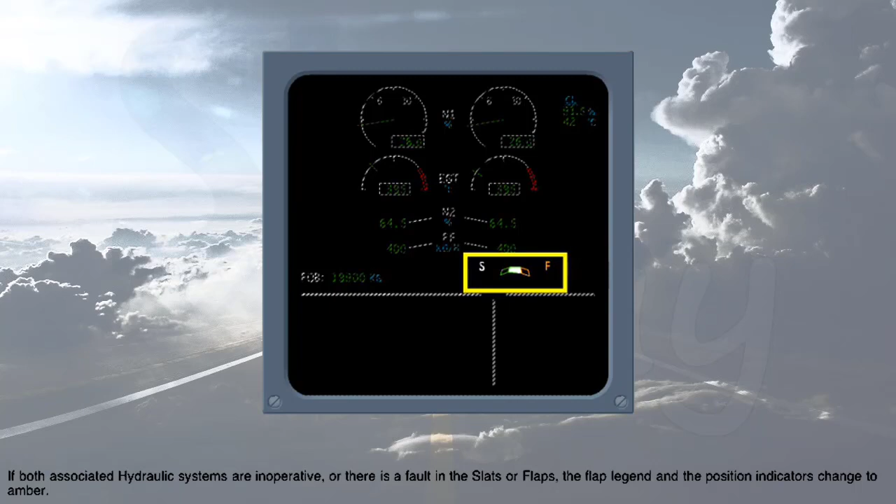When the flaps are extended, the ailerons droop 5 degrees. This position is indicated on the ECAM by an index on the aileron scale. If both associated hydraulic systems are inoperative, or there is a fault in the slats or flaps, the flap legend and the position indicators change to amber.

The slats locked message or the flaps locked message is displayed with an ECAM caution when the wingtip brakes are engaged, or when there is an asymmetry condition between the slats or flaps.

An alpha speed lock function prevents slat retraction at high angles of attack and low speeds to guard against stall. If angle of attack exceeds 8.5 degrees or the airspeed is less than 148 knots, slat retraction from position 1 to 0 is inhibited.

When the flaps lever is moved from 1 to 0 under these conditions, the flaps only will retract. The slats will eventually retract when the speed increases to VLS for config 0. Note, slats do not automatically extend if alpha is exceeded or if airspeed falls below 148 knots.

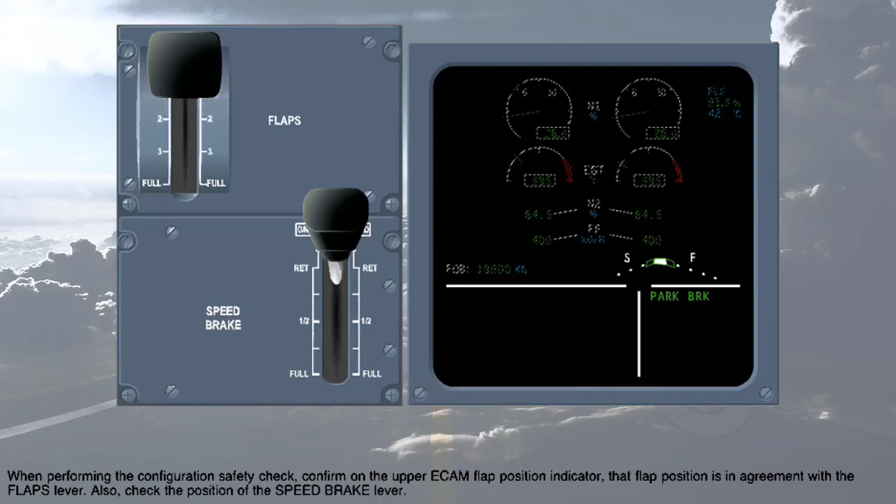When performing the configuration safety check, confirm on the upper ECAM flap position indicator that flap position is in agreement with the flaps lever. Also, check the position of the speed brake lever. If the flaps are not in the 0 position or the speed brake lever is not in the retract position, contact maintenance. Do not apply hydraulic power or move any flight control surface without first obtaining maintenance clearance.

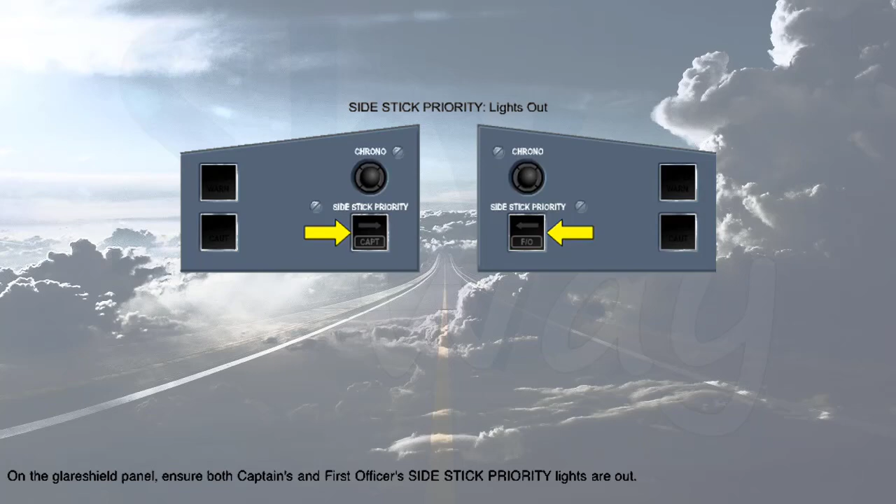On the center pedestal, again, ensure the speed brake lever is in the retract position and the flaps lever is in agreement with the ECAM flap position indicator. Normally, the flaps will be in the 0 retracted position. The rudder trim rotary switch should be centered. Push the reset button to ensure the rudder trim is zeroed and confirm the position indicator is 0 plus or minus 0.8 degrees.

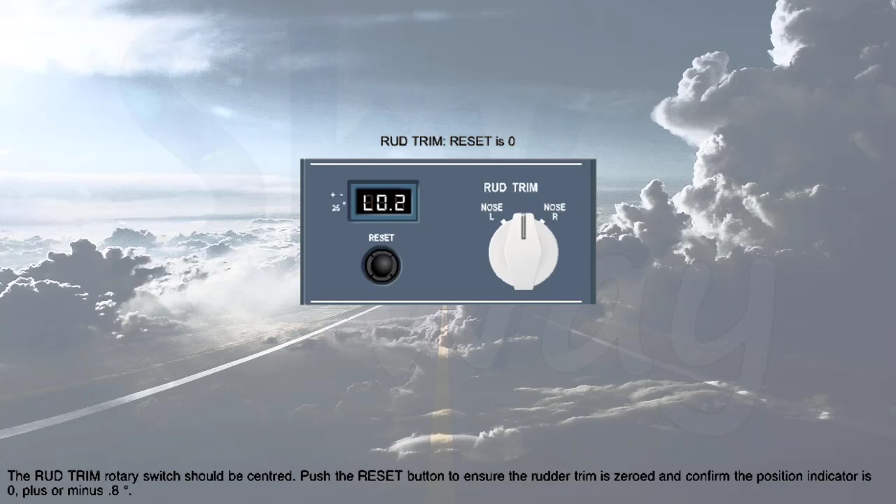As part of the after-start recall scan flow, the captain selects the desired takeoff flap setting and arms the ground spoilers. Touch the flaps lever to select the takeoff flap, then touch the speed brake lever to arm the spoilers.

The flap position is confirmed on the ECAM flap position indicator, and the message "Ground spoilers armed" appears in the memo section of the upper ECAM. If 2 minutes has elapsed since the second engine start, the takeoff memo appears indicating spoilers armed.

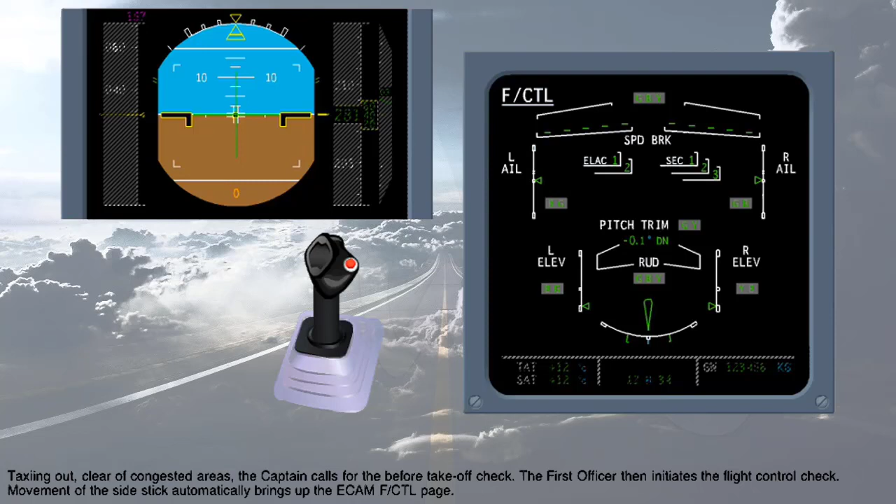Taxiing out, clear of congested areas, the captain calls for the before takeoff check. The first officer then initiates the flight control check. Movement of the side stick automatically brings up the ECAM flight control page. The first officer checks each control surface on the respective control position indicator, pausing momentarily to confirm full travel. This check includes the 5-degree aileron droop with the flaps extended.

He also confirms full side stick movement by observing the limit indices on the PFD. Touch the side stick to perform the control check. The sequence is side stick left check, right check, forward check, aft check.

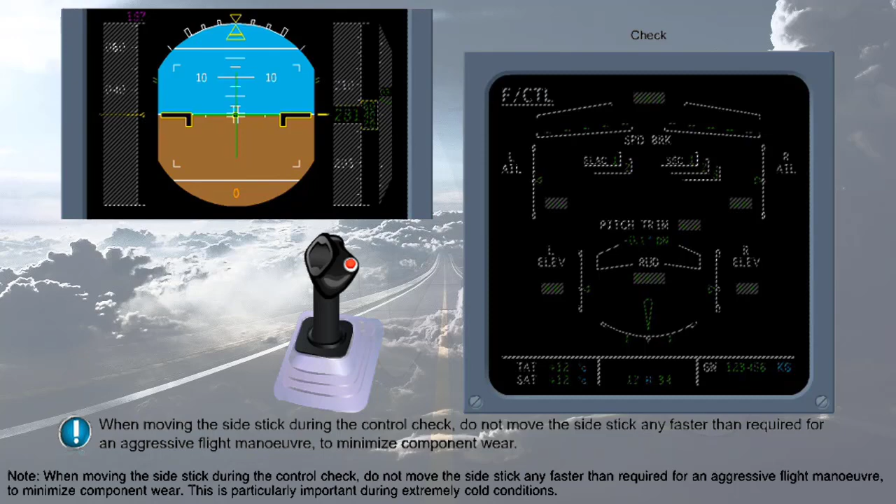Note: when moving the side stick during the control check, do not move the sidestick any faster than required for an aggressive flight maneuver to minimize component wear. This is particularly important during extremely cold conditions.

The first officer, after completing his portion of the flight control check, announces that he is ready for the rudder check, which is performed by the captain. The captain depresses the pedal disconnect button on the steering hand wheel, then moves the rudder pedals in both directions. The first officer, while following through on his own rudder pedals, observes full rudder travel on the ECAM. Touch the pedal's disconnect button, then the left rudder pedal to start the rudder check.

Please try again. Please try again.

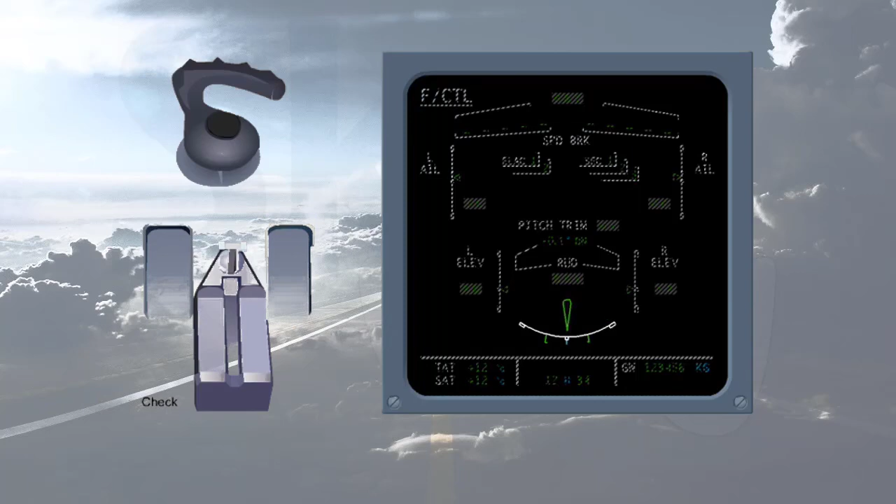The captain also checks for full and free movement of his own sidestick and confirms the sidestick controller against the ECAM flight control page. This is a silent check. The first officer sets the pitch trim from the load closeout data and observes the setting on the ECAM flight control page. In addition, rudder trim is confirmed to be at 0.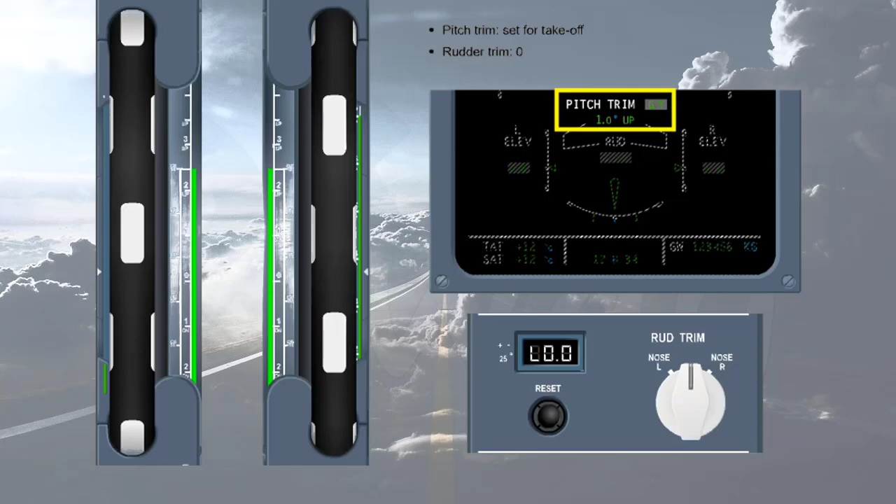During the takeoff roll, control deflection is in direct proportion to sidestick movement. When takeoff power is applied, half travel forward sidestick input should be applied to prevent the nose from pitching up. At 80 knots, gradually reduce this pressure to reach stick neutral at 100 knots.

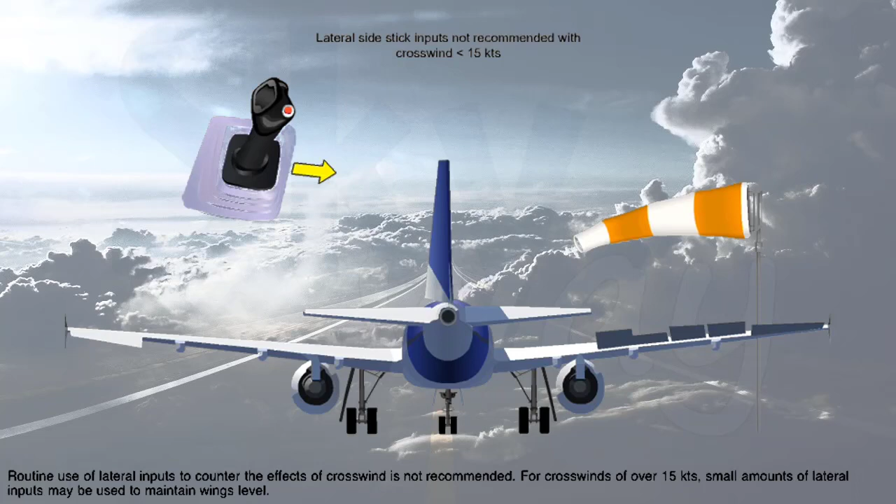Routine use of lateral inputs to counter the effects of crosswind is not recommended. For crosswinds of over 15 knots, small amounts of lateral inputs may be used to maintain wings level. Too much results in excess spoiler deployment, which has the effect of increasing the tendency of the aircraft to turn into wind, reducing lift, and increasing drag.

At VR, smoothly rotate the aircraft into the pitch command bar. At liftoff, as the aircraft transitions to flight mode, any lateral inputs used to counter the effects of strong crosswind must be relaxed to prevent the aircraft from rolling and to maintain wings level. This ensures a smooth transition to flight mode. Remember, in flight, lateral sidestick inputs demand roll rate.

When the acceleration altitude is reached, the flap slats are retracted. If takeoff was performed with flaps 2 or 3, select flaps 1 at F speed, the minimum speed for flap retraction, then select the flaps up at S speed, the minimum speed at which the slats may be retracted. If takeoff was performed with flaps 1 plus F, they are selected up at S speed. Touch the flaps lever to select the flaps up.

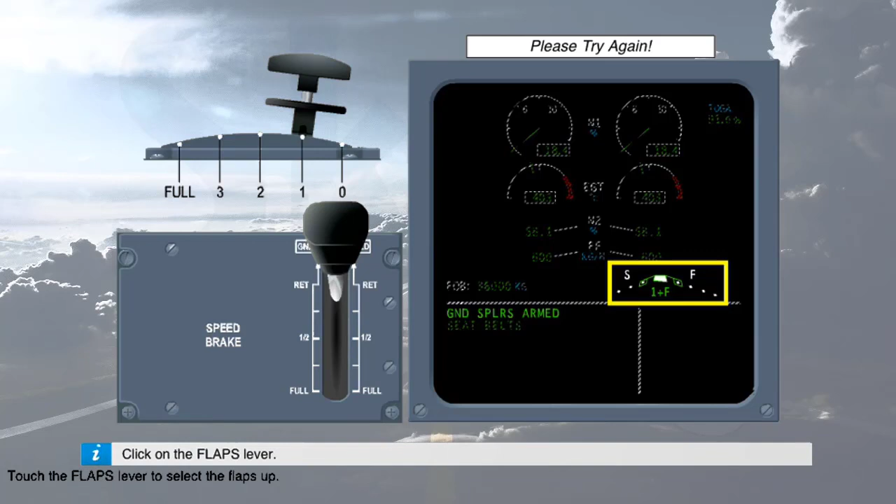Please try again. Once the flaps are up, the PNF announces flaps up. The after takeoff check is then requested by the pilot flying as soon as practical after the flaps are up. The PNF disarms the spoilers by pressing straight down on the speed brake lever. Disarm the spoilers, then touch the right arrow to continue.

FMGC computed speeds default to flaps full. If a landing in Config 3 is desired, line select Config 3 on the MCDU Performance Approach page so that all FMGC computed speeds displayed are for the correct configuration. Line select Config 3.

Also, on the overhead GPWS panel, select Landing Flap 3 to prevent nuisance flap warnings close to the ground. GPWS Flap 3 is displayed on the ECAM memo section. Select Landing Flaps 3, then touch the right arrow to continue.

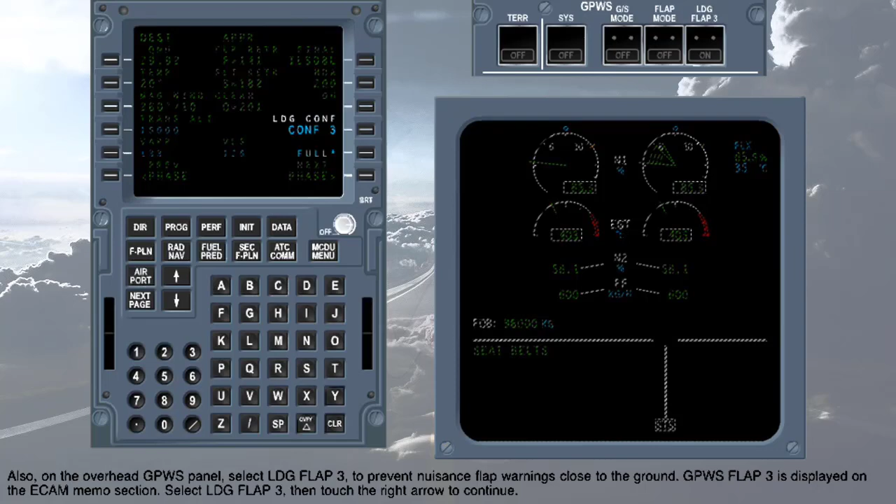In a managed descent, if the aircraft becomes high on the profile, the message "More drag" is displayed on the PFD. Extend the speed brakes to the 1/2 position until the profile is regained. On approach, the pilot flying calls for flap selections at the appropriate speeds. At green dot speed, select flap 1. In managed speed, the aircraft decelerates to S speed. Touch the flap lever to select flap 1, then touch the right arrow to continue.

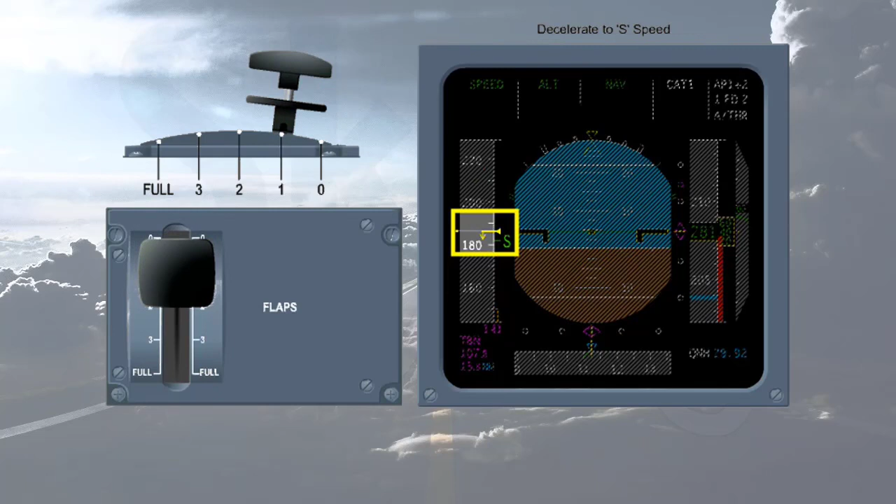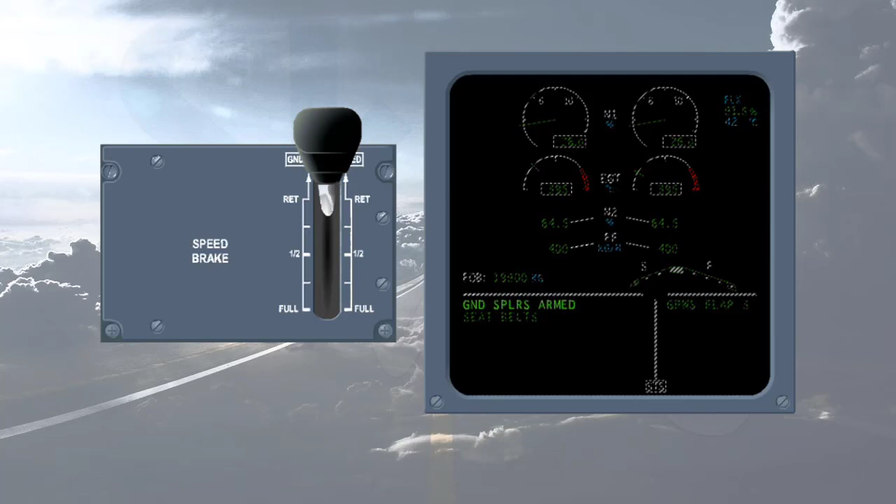When flap 2 is selected, the aircraft decelerates to F speed. Touch the flaps lever to select flaps 2. At the appropriate time, the pilot flying calls gear down. Landing check. The PNF arms the spoilers by pulling straight up on the speed brake lever and reads the landing check. Touch the speed brake lever to arm the spoilers, then touch the right arrow to continue. Touch the flaps lever to select flap 3 and decelerate towards V-app. If the flaps full landing was planned, select flaps full.

At approximately 30 feet, perform the flare maneuver by pulling back gently on the sidestick to counteract the induced pitch down input. In a crosswind, the preferred technique is to use rudder to align the aircraft with the runway. If the input is gentle, very little, if any, lateral control is required. Remember, sidestick input in flight demands roll rate. At touchdown, gently lower the nose.

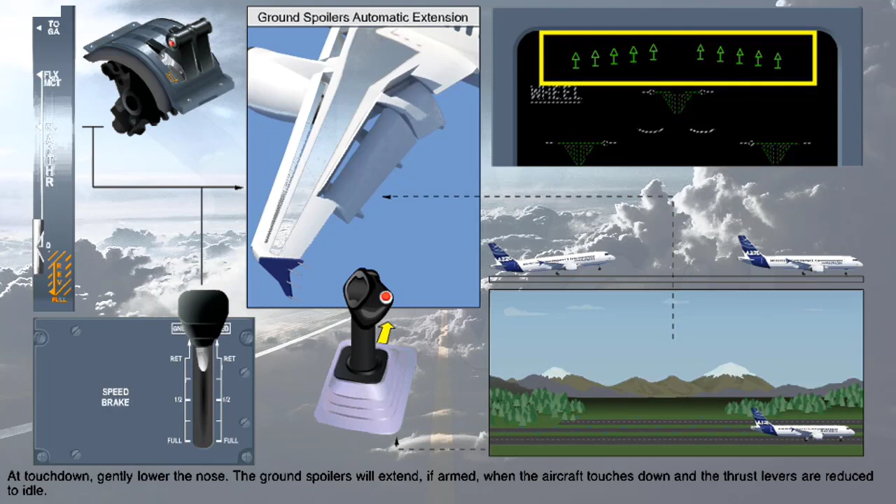The ground spoilers will extend, if armed, when the aircraft touches down and the thrust levers are reduced to idle. The PNF confirms ground spoiler deployment on the ECAM wheel page, which was automatically displayed upon gear extension. If the ground spoilers do not extend automatically and the landing was made with flaps full, they cannot be extended manually. If the landing was made with flaps 3, it is possible to extend the flight spoilers only by moving the speed brake lever aft.

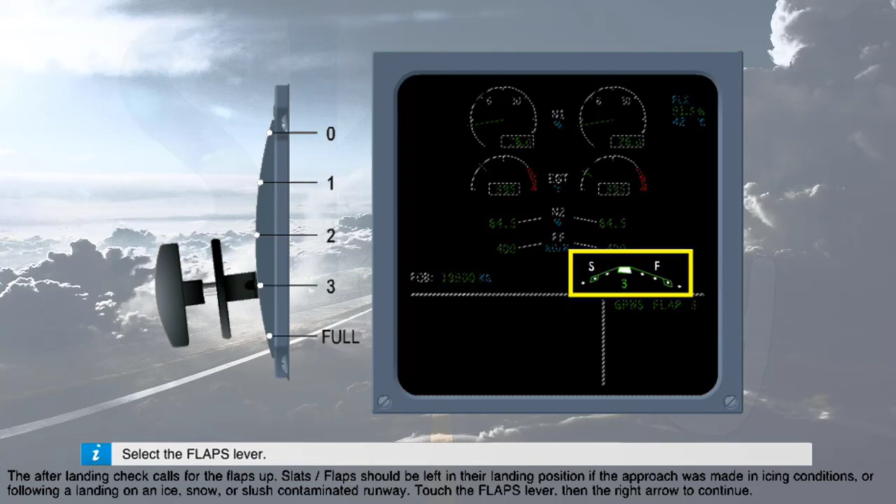The after landing check calls for the flaps up. Slats and flaps should be left in their landing position if the approach was made in icing conditions or following a landing on an ice, snow, or slush contaminated runway. Touch the flaps lever, then the right arrow to continue. Disarm the ground spoilers by pressing straight down on the speed brake lever.

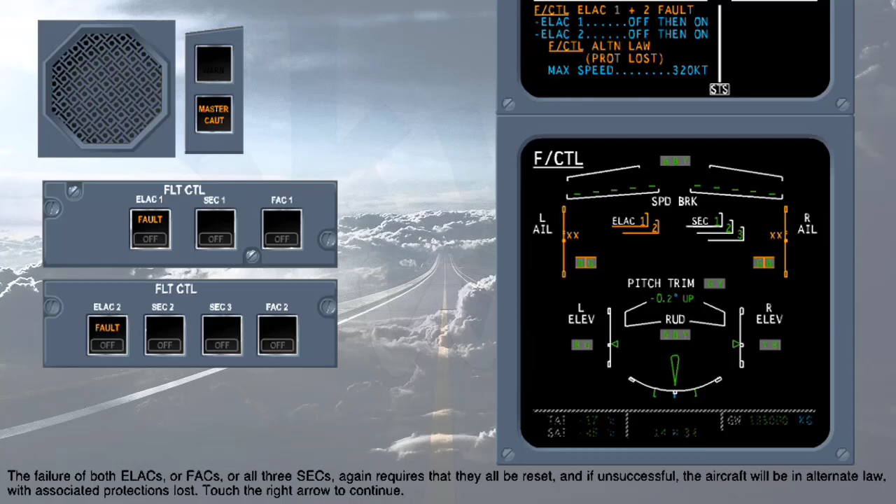The failure of both ELACs or FACs, or all three SECs, again requires that they all be reset, and if unsuccessful, the aircraft will be in alternate law with associated protections lost. Touch the right arrow to continue. The flaps are currently selected to and indicating Config 1 in flight. Touch the flaps lever to select Config 2.

Recall that, due to flaps or slats asymmetry, runaway or uncommanded movement, the wingtip brakes are activated and the flaps and/or slats are locked in their current position. The wingtip brakes can only be reset on the ground. In this example, the flaps have locked between positions 1 and 2. The flaps locked caution is generated along with the master caution and single chime.

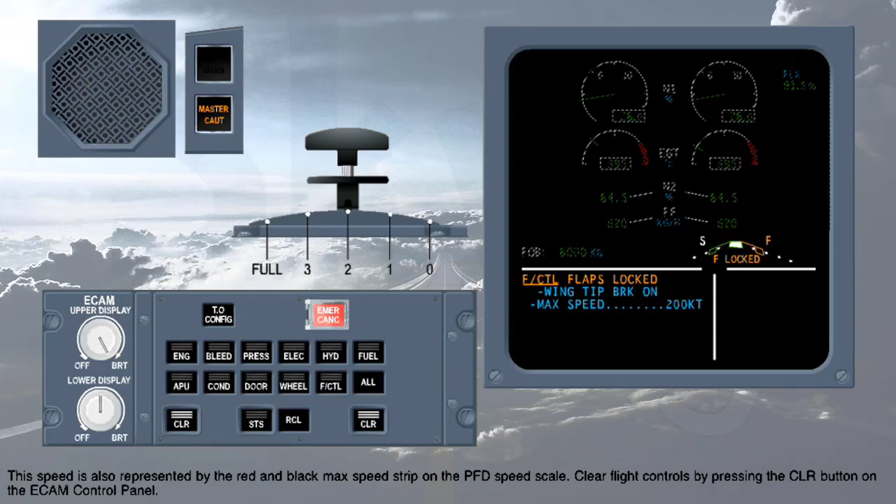ECAM advises that the wingtip brakes are on and displays the maximum flap extension speed for the current flaps lever position. This speed is also represented by the red and black max speed strip on the PFD speed scale. Clear flight controls by pressing the clear button on the ECAM control panel. The status page indicates that flap 3 is to be used for landing.

The approach speed additive is added to the VLS speed as displayed on the MCDU approach page and is manually entered by typing it into the scratch pad, then line selecting it into the VAP field. The landing distance must be increased due to the higher approach speed and loss of aerodynamic braking from the flaps. If a diversion was necessary, consider increased fuel consumption to the diversion airport.

Refer to FCOM 3.02.10 Operating Techniques, which gives landing, go-around, and diversion procedures and fuel consumption guidelines. Clear status by pressing the Clear button on the ECAM control panel.

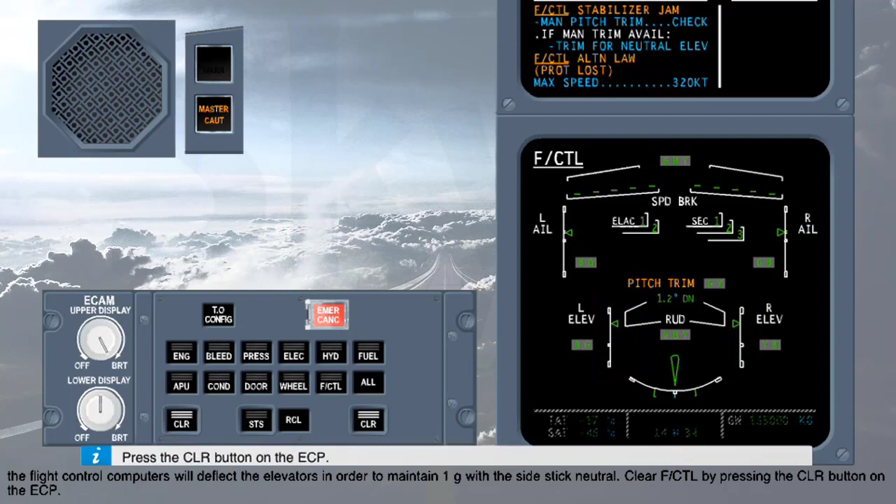Flaps 3 is used for landing, and if manual pitch trim is not available, landing gear extension is delayed until the flaps are in Config 3 and the speed is reduced back to VAP. This is because once the landing gear is down, direct law becomes active, and although the previous elevator position is maintained, any further speed and configuration changes would require constant sidestick pressure. Control forces, however, will be light due to the lack of an artificial feel system.

The approach speed must be modified to VREF plus 10 on the MCDU approach page, and a landing distance factor must be applied to the landing distance. Whenever this factor is not displayed on ECAM, it can be found in FCOM 3.02.80 Miscellaneous Procedures or in the QRH. In-op systems are listed on the right-hand side of the status page. Attitude, overspeed, and alpha limit protections are not available in alternate law. Clear status by pressing the Clear button on the ECAM control panel.

If the pitch trim wheel is jammed, the ELACs may not detect the failure. There will be no ECAM warning, and normal law remains active. The only indication of a problem may be that on the ECAM flight control page, the elevators remain deflected. The procedure can be found in FCOM 3, Abnormal and Emergency Procedures, Flight Controls. Disconnect the autopilot, then check the manual pitch trim operation, and if available, trim to maintain the elevator at the 0 position. If not available, use flap 3 for landing.

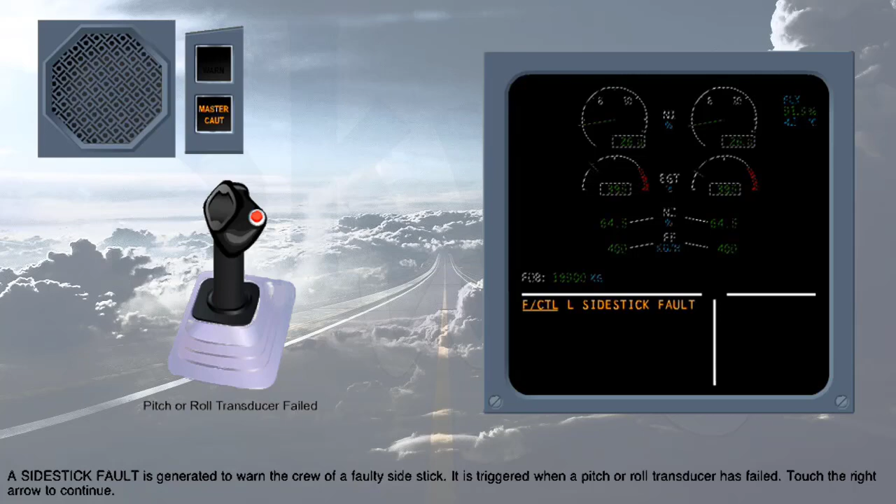A sidestick fault is generated to warn the crew of a faulty sidestick. It is triggered when a pitch or roll transducer has failed. Touch the right arrow to continue. With the loss of both elevators, only manual pitch trim is available for pitch control. As well as the ECAM warning, the message "Manual pitch trim only" is displayed on the PFDs.

Do not use the speed brakes because of the induced pitch changes, which may be difficult to control with manual pitch trim only. Clear flight controls by pressing the Clear button on the ECAM control panel. The status page outlines the approach procedures and reminds the pilot that pitch control is mechanical backup and roll control is direct law. Clear status by pressing the Clear button on the ECAM control panel.